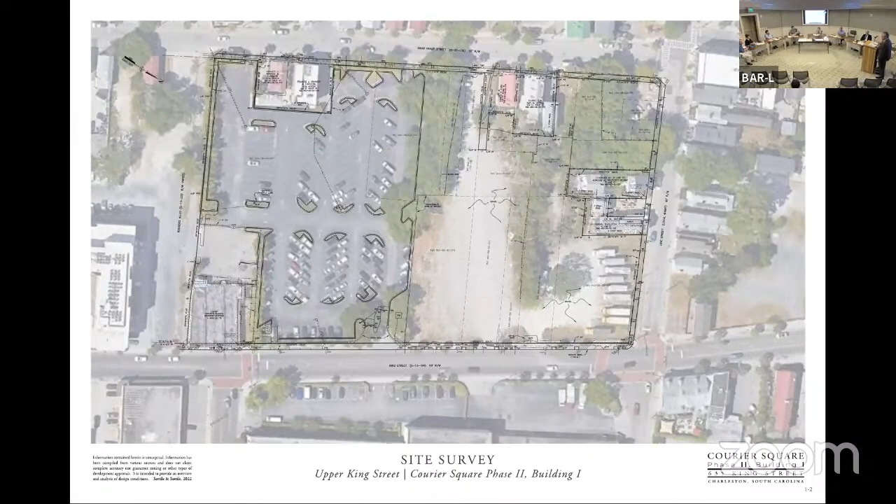The photographs of the site are provided here as part of the packet, and you'll see a forlorn King Street in some of these views. It's lost its physical expression, it's lost its pedestrian orientation, but all the building blocks are there. If you look at the image in the top left, there's a skyline view of the site from the Septima Clark Parkway as you come around that corner, and that was on our mind as we began to think about what is the building's responsibility to the street first, but then also to the city skyline.

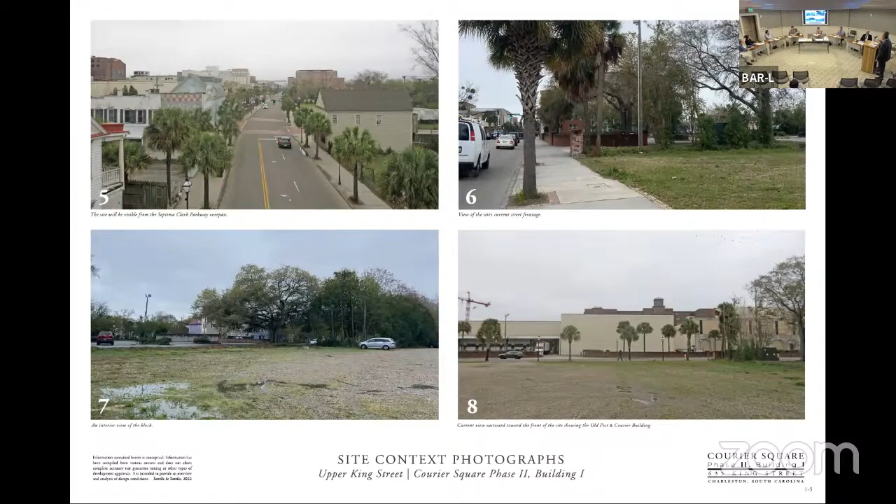This really came together for us during the design charrette, and we've included just a few of those pages. It's a week-long public design process that we held right near the site in the old printing building of Post and Courier. It also involved a lot of time in the field, and meaningfully, time we were able to spend with the faculty and students at the American College of Building Arts, which launched a commitment to reinvesting in the built environment and reuniting the arts and new work, which for a building of a larger scale is a tall order. It's one we've all taken very seriously, but that inspiration and partnership began almost 2 years ago.

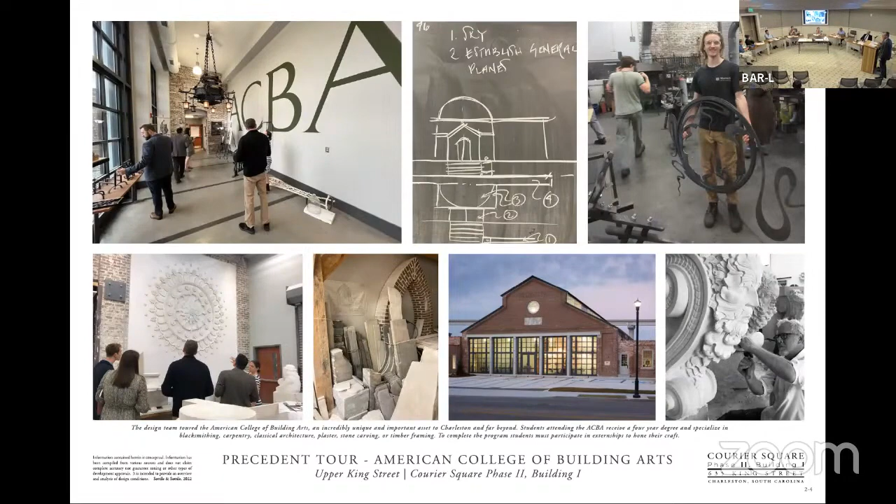We asked a lot of questions at the charrette that led to the design, and if I had all night we'd talk about all of it. But in particular, the need to celebrate the skyline again, to reanimate the skyline. The buildings, certainly in Charleston, are known for what they contribute to the skyline. So thinking of the head of a building in this humanistic way of thinking about architecture, what you place in the skyline becomes the definition of that.

So we thought of ourselves more as hatters, and not architects, during the charrette. And then for the street, thinking of ourselves more as cordwainers, or fine shoemakers. So we think about how a building touches the street, remembering the most important things a building will ever do is touch the street and touch the sky. We spent a lot of time during the charrette talking and thinking through that.

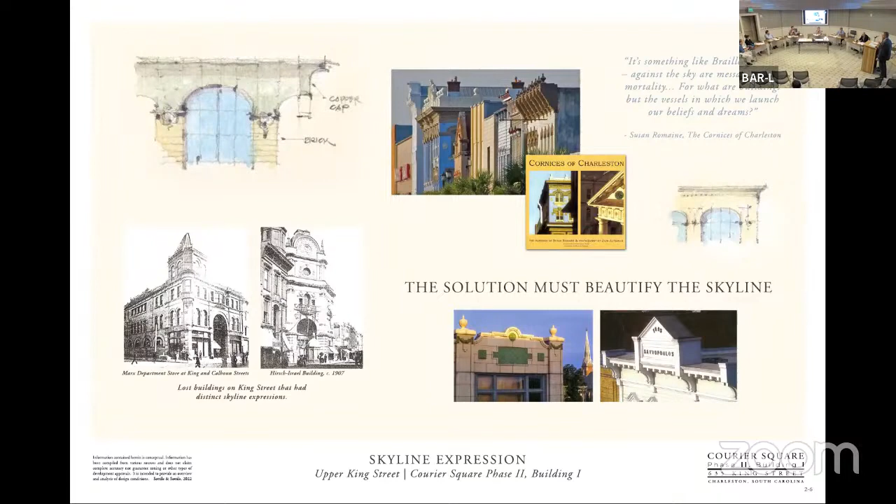Certainly Jack Alterman and Susan Romaine's fine book on the cornices of Charleston remind us what the city is known for: buildings that are still here and buildings that have been lost over time.

And remembering this is important, because you're going to see there's very much a call to action with this building, bringing back an exuberance, a celebration of the built environment and the work. We have to remember this is what Charleston does, and it does it better than almost any other city you can think of. So we brought that thinking into the design of the building, into the charrette, and it really became the foundation of our thought.

We published what we call the small manifesto on this as we worked through that process. Lawrence, you can.

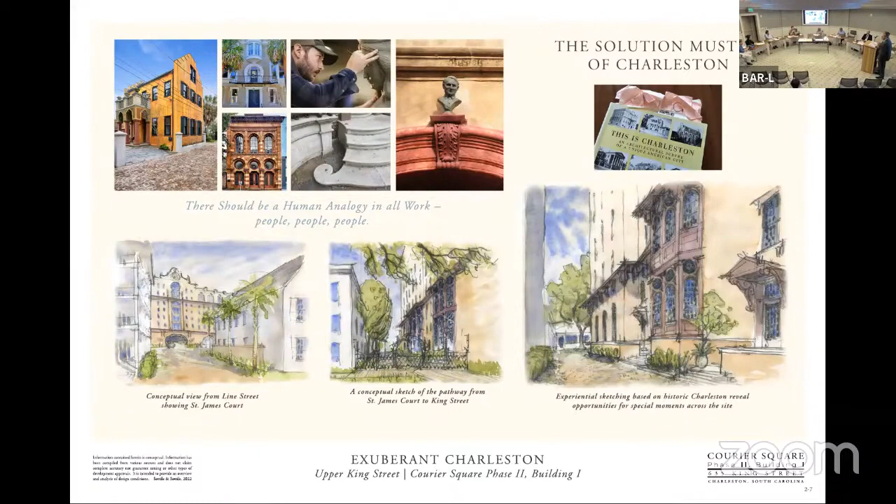So the manifesto, we really see this as our report card for this project from day one to the very end. We're at the second stage of a 3-stage approval process, but this remains our call to action: that the solution for this building must be humane and it must be of Charleston. It must relate well to all frontages. This is a unique site that has 4 very distinct frontages with different obligations. It must beautify the skyline and it must reward the street experience. So those are the things we know to be true.

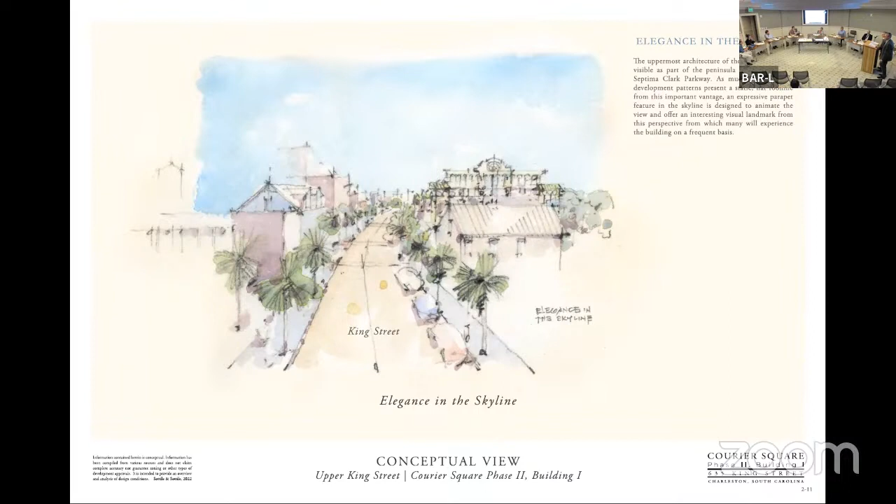So the building presents to the skyline an elevated parapet, that's to the regional viewer of the skyline. It's designed as a contribution to add up to other elements that are coming into this skyline: the cupola of the peninsula, the senior living project just to the south of us, the clock tower of the Guild. So elements on larger buildings that become part of Charleston's skyline over time.

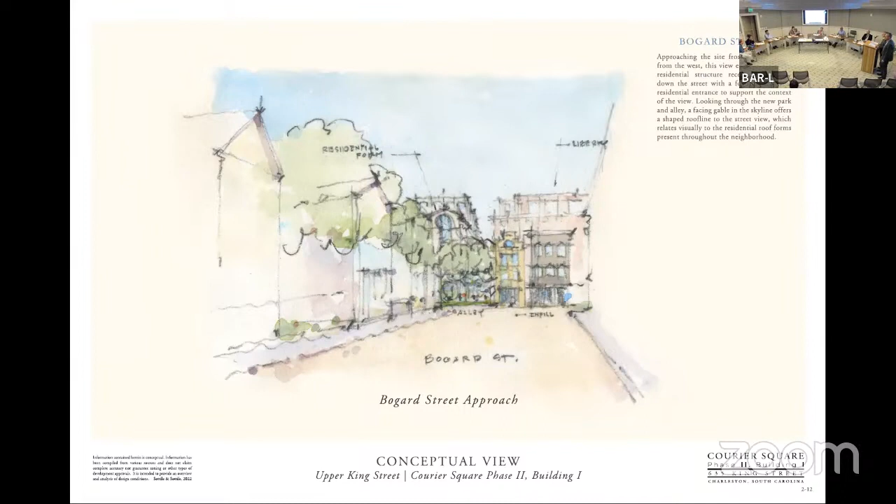From the neighborhood, this idea of creating pavilions really helped us think about approaching from Cannonboro, Elliottboro, looking up Bogard Street toward a new park that has an oak tree being relocated, a beautiful oak tree that becomes a connecting link through a new alley, Gabriel's Alley, all the way up to King Street, presenting a residential entrance and a pavilion to the neighborhood that harkens to the residential form language of the roof lines. On King Street, the principal facade is the 3-pavilion approach.

One observation of modern residential or multifamily development is often that the entrance is hard to find, and we felt with this project the entrance should be front and center, and it's exactly what you'll see. We'll talk about that in detail.

The architectural drawings we've presented at the preliminary review have been curated from a much larger set of drawings, but what we've built here for your review tonight at the preliminary stage of approval, we would like to walk through to show you all the principal elements, details and forms.

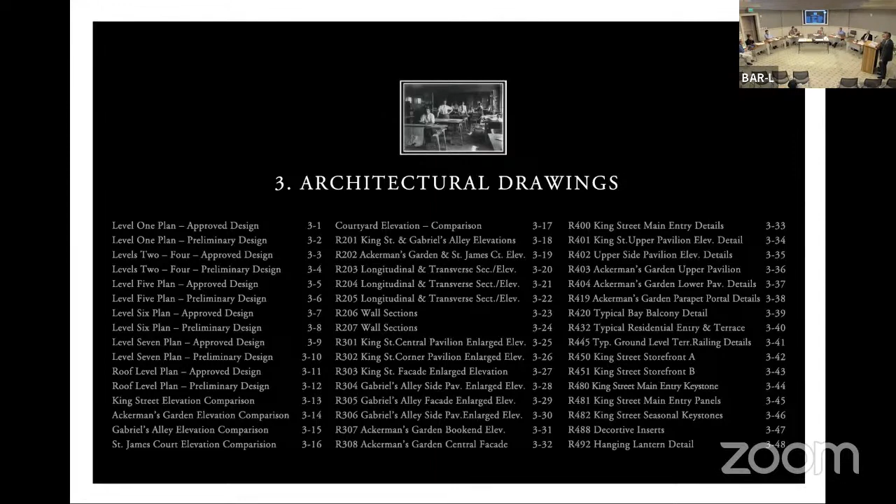I guess we'll start with the floor plans. These are the approved conceptual floor plans, and what you'll see is King Street is at the bottom, so we have our retail frontage along King Street with our primary residential entrance in the center. To the left is Gabriel's Alley, which heads into the neighborhood. Along the top is Ackerman's Garden, a new interior courtyard space. St. James Court is to the right side, set inboard from Line Street, where entrances to vehicular parking, bicycle parking, and some services are taken in the property more in the mid block.

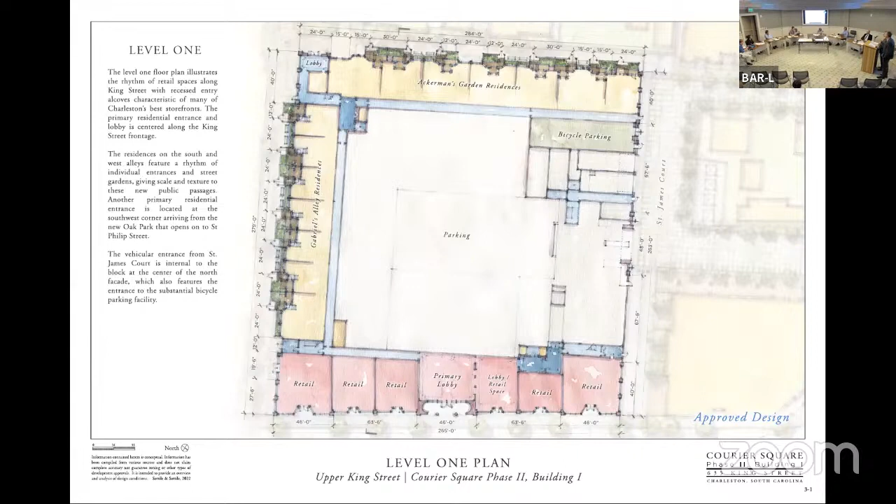As you'll see, the retail frontage on King Street is foremost about fronting King Street in that manner. The residential entrances in the alley and the garden are designed to create a scale, a texture, and movement in those surfaces to create an inviting experience.

This compares the development of the design during the last 18 months of work. What you're seeing here is the main level floor plan, which captures all the intent that you saw in the conceptual document. As we go through the building, this is a building that fronts all 4 sides, as you'll see as you go up through the building. It has residential use on the upper levels.

Excerpt from the construction documents. As we move up to level 5, we have a private courtyard that's part of the building, set back toward the garden side, also as a way to start to bring that massing down, to break that massing down.

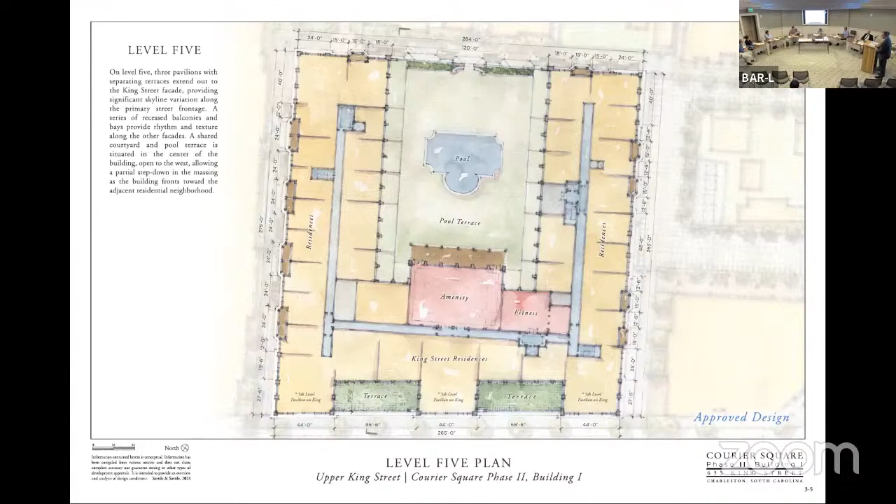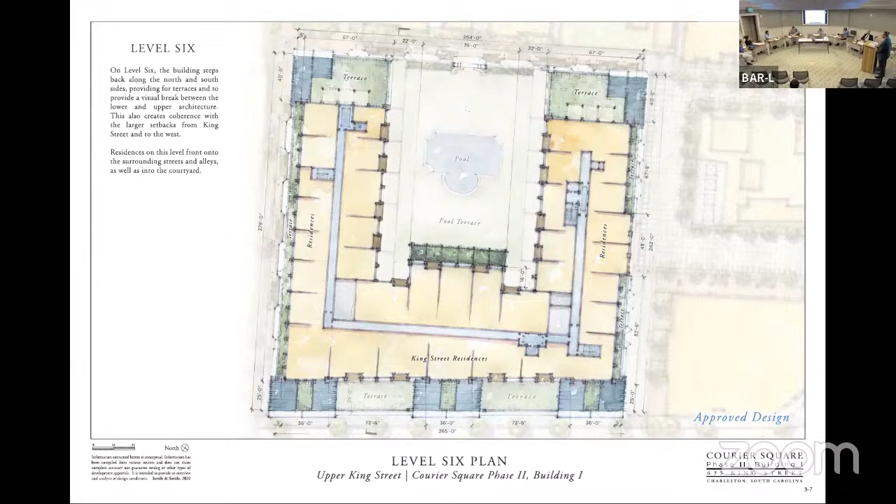Let's see the preliminary design here. As we go up to levels 6 and 7, the building starts to pull back from the neighborhood side, and continues up on the King Street side, set back from those 3 pavilions, and also set back from both the left and right sides to create a datum line of massing at that 4- and 5-story level.

So you see that here in the approved design. One element as we go to the roof level, I want to point this out, and I'll point it out on the elevations as well. At the conceptual design, we had a scheme with 4 large parapet features that marched across the building. It looked good diagrammatically.

That is something in further study that we've modified our approach to. We realized what really started the need for this was to have a really stunningly beautiful parapet facing Line Street, facing the regional skyline that we were looking at and inspecting, which we see from the highway. So we've modified that to really focus our energy on detailing and developing that as the primary parapet. I'll show you on the elevation some of the other thinking there, but that's a change I wanted to point out.

Here, what you're seeing stacked above and below is the approved conceptual design in the upper register and the preliminary design, an excerpt from the construction documents, at the lower level. And I would say when you look at this briefly, you'd say it should look like the same building. It is the same building. But I can't tell you how much work there's been to get from the top image to the bottom image.

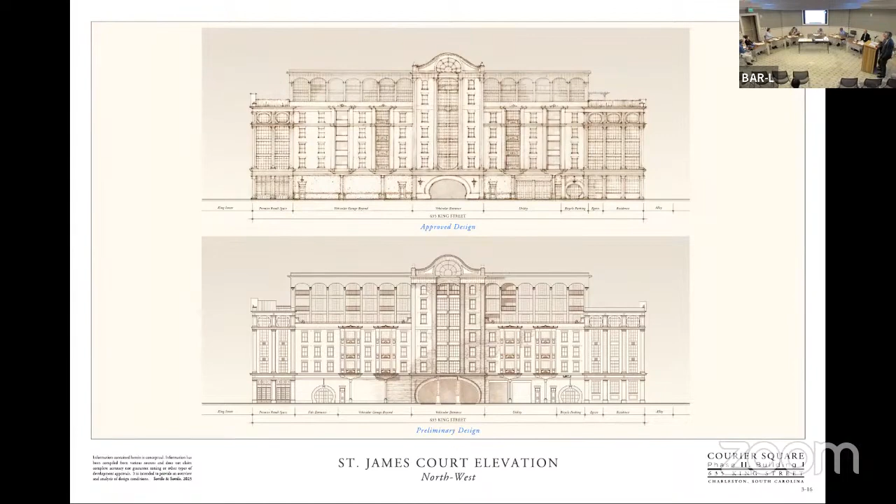The bicycle entry is to the right, and we modified an entrance to the left of that as well to create another residential entry into the lobby there. So these are all part of that secondary interior facade. I wanted to point that out.

And then these are the interior courtyard elevations that were prepared and approved. For the facades, we presented drawings at 3 different levels of detail. The 200 series drawings show the overall elevations for context, and also have callouts for each of the individual elements that are enlarged and developed in greater detail.

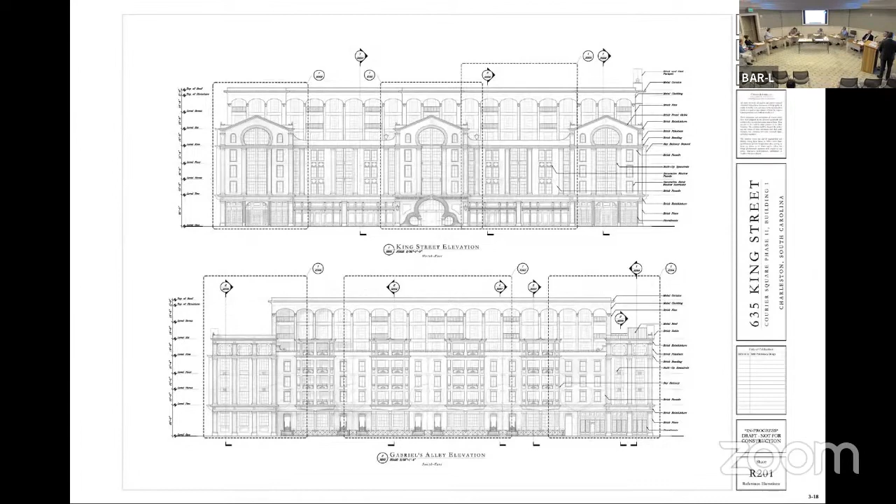So we're seeing here the front elevation and Gabriel's Alley elevation, and then here the elevation on Ackerman's Garden and the elevation on St. James Court.

This series is placed as a way of getting you locators to move into the more detailed drawings that follow, as well as section cuts. These are the interior facades and setback facade.

Building sections through the building. I'm pleased to say we've been working extensively with the LS3P team as the building has been developed to ensure absolute concurrence between all the facade detailing and the framework of the interior building. So it's a glimpse of that section.

A series of wall details shown here, which are helpful for us at this stage of the project to show the depth and movement in these facades. It's very important for a building of this scale to have those protocols thought through in terms of the assembly of each facade. So there's a series of wall sections of all the conditions through the building shown here, sheets 206 and 207.

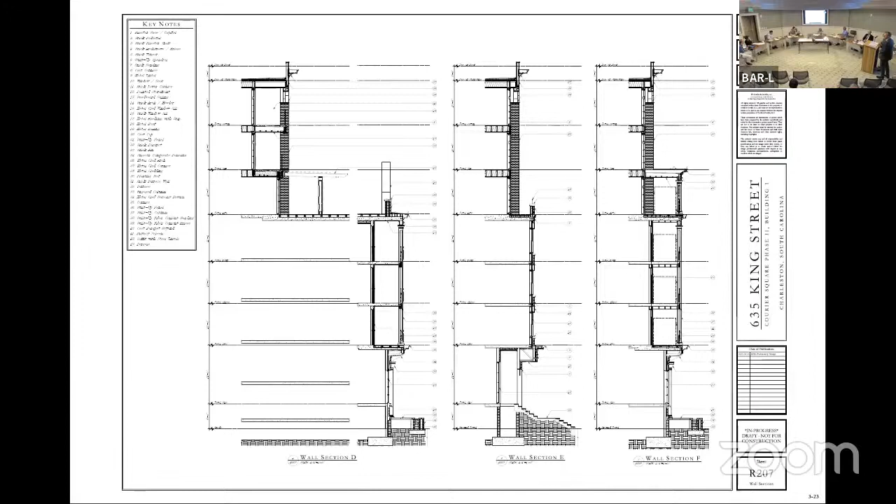The next series of sheets, the 300 sheets, take all the most important conditions of the building and enlarge them to go through the entire roster of materiality, identifying where those key elements of detail are. This is the central entrance to the building, an area where, working with the American College of Building Arts, we've really focused on finding where detail is most warranted. Without question, the front entrance is the place, but as we go through the building, you'll see those details incorporated throughout the design.

So you're seeing here a real focus on street level, and then a focus on the pavilion mass and the skyline on King Street. This is one of the corner pavilions on the King Street frontage, another example of a lot of focus on getting texture and a handmade quality to the storefronts at street level, while also getting the geometries and proportions of the King Street skyline right, resolving all this compound ellipse geometry into the design.

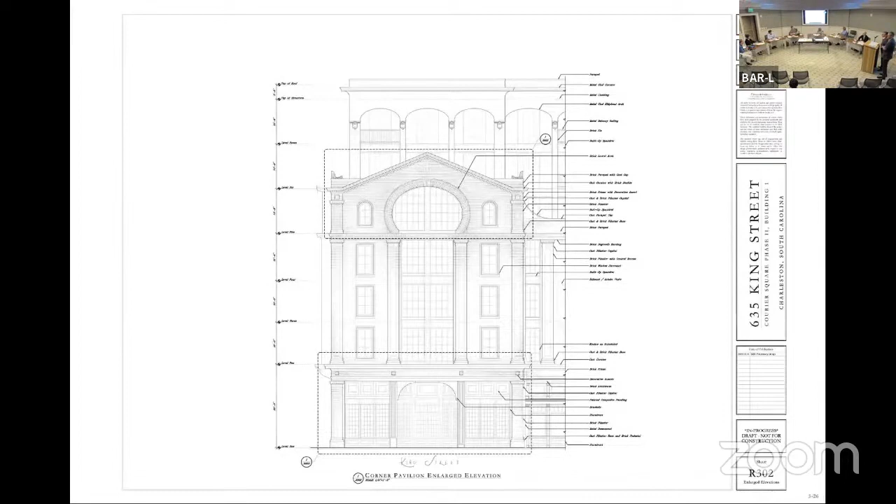These are some of the intervening elements along that King Street frontage. We have a rhythm of 4 bays that sit between the pavilions, 2 at each side. There's a keystone at the top of each of those window stacks, so there are 4 feature keystones along King Street. I'll talk about those a little later on.

A lot of attention is focused on King Street, as you might imagine. As we look at some of the other facade enlargements, I think you'll see that as we go around the building, we've looked for areas where detail can be incorporated throughout. For example, as we turn down Gabriel's Alley, we have our retail frontage on the first 3 bays folding around the corner, but you'll also see decorative inserts that are cast or carved into limestone and set above each of those pilasters. So anywhere you look, there's an opportunity that's been calibrated for handmade detail.

The bay balconies, as we move through Gabriel's Alley, are a way of creating texture and layers and aerating that facade. We have small individual residential entrances, 16 entrances along Gabriel's Alley and Ackerman's Garden, each with an opportunity for custom ironwork at its entry gate.

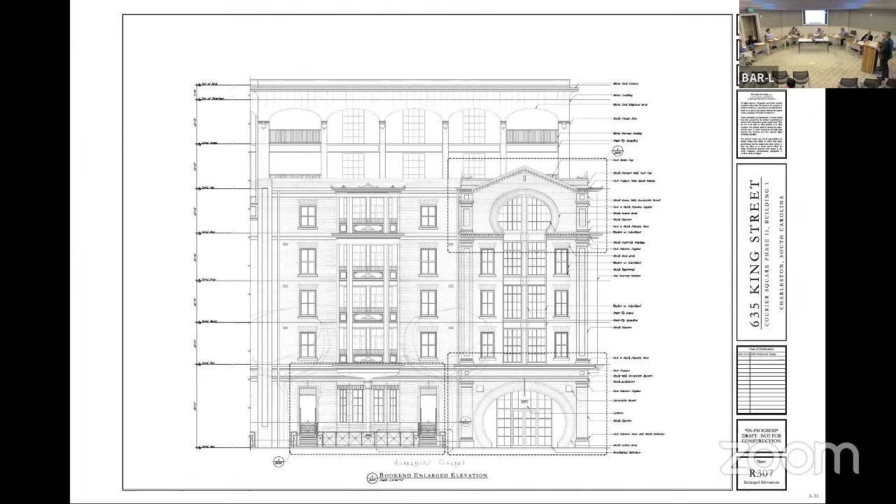And then this is the side of the pavilion as we head toward the Oak Park. This is that smaller, more romantic residential entrance that you'd see from the neighborhood as you come into the Oak Park—a diminutive version of those King Street pavilions. And then this is the central portion of the building where the internal courtyard is, with a decorative element to help enliven that facade and add light to that view.

And then we move into the 400 sheets, and we presented just a few of them here to give a sense of the work that's been done. The 400 sheets move up to another scale beyond the quarter-inch scale of the elevations we were just reviewing. Here we've gone into all of the key areas of the building and really worked through the geometries with the entire professional team, the builders, and the masons that have been brought on already to help us finalize each of these details.

And so you're seeing some of the most complex geometries here in this central entrance. What's good about this is it gives us real rules to proceed with on some of the architectural details. Those panels to the left and right of this central arch are designed as a complement to the keystone over that central entry, and that's one of the elements we've been working carefully with the ACBA on as part of the decorative program of the building. This lets us be very specific about exactly how big that panel will be and where it sits and courses into the brick, so we can begin preliminary designs and mock-ups of those elements. We'll talk a bit more about that as we go further along.

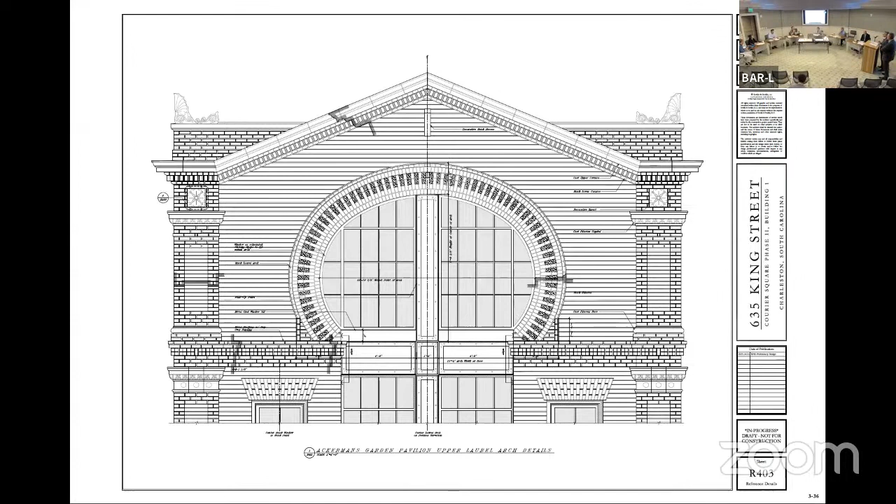So another example at a 400 level, here we have a larger medallion that's been cast into the surface or carved, but then placed in the surface during the coursing of the brickwork.

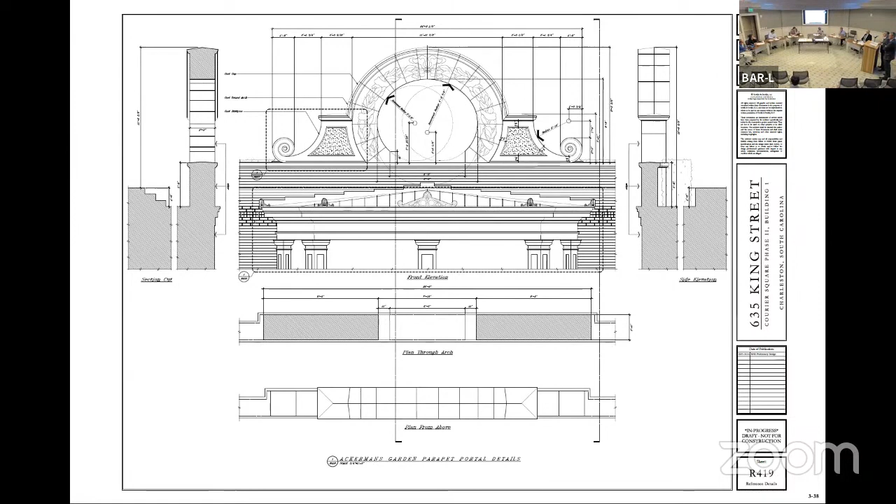We could go on. This is a close-up of that parapet element at the courtyard level up on level 5.

Yeah, sort of a gift to them. It's funny, and we realize with decorative details, none of these things are required, right? And that's the world that we're in now. It's the third element of the Vitruvian triad. The thing that's not required is actually the thing we need most right now.

So we've really, as a whole team, worked very carefully to take the promise of a beautiful building and hold on to that promise with every decision, knowing that none of these things are required, that they all, in a sense, are required by what the city stands for and what the future is. I could go on about that, but just to say I hope you see that in everything.

Close up at the alley level there, where again we have pilasters, limestone pilasters that are set into that facade, actually modeled on some of the coursework that the ACBA is doing already today in their studios. So everything has been done with an eye toward implementation and feasibility.

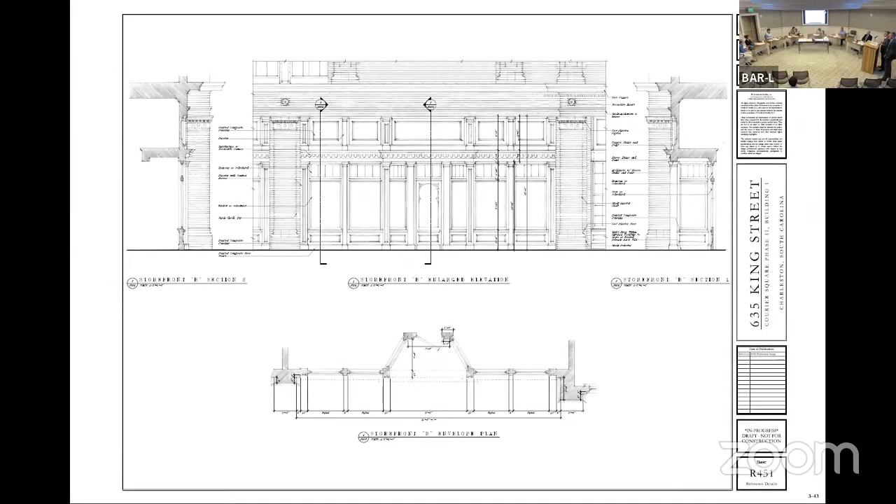Close-ups of some of the ironwork designed for that alley. A bit of this on the storefronts here, this again to show that the storefront design is meant to be a built-up storefront, not so commercial as so many storefronts are today. We have two types of storefronts along King Street, one of the ones at the corner pavilions and then the intervening ones, then of course the central entrance all of its own.

And then to the decorative details, the fun part, we wanted to share some of the thinking here in this question about returning to the art of building. We felt there was maybe no more appropriate location than the central entrance to the building. So the keystone that sits above that central main entry on King Street is symbolic in bringing together architecture, painting, and sculpture again. And so our keystone represents a figurative allegory to architecture.

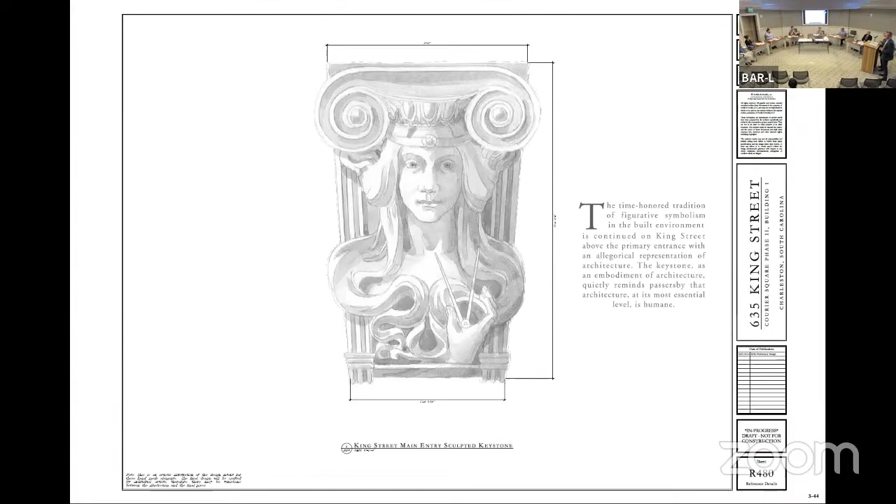And to the left and right, we have the limestone panels there representing painting and sculpture, both supporting architecture. So that's sort of a thesis within a thesis. But we felt like this was the place to do it.

Really create something to stop and study, and something that is made by people. And I think that's what the resource of the American College of Building Arts is such an incredible asset, not just to Charleston, but to the world. So we're very excited about this.

We have field tested even these mock-ups. We've printed them out at full size and we've held them up in public. We've sometimes gone to parking garages.

We got kicked out a few times trying to climb up to a height where a detail would be seen from the street, to hold that detail up and test its size, and in some cases we made small adjustments. We presented some of those here.

The four keystones along King Street each represent four seasons, and four seasons of architecture. Spring is Art Nouveau, summer is full-blooded classicism, autumn is Baroque, and winter is Gothic design. So another story, all playing off the same theme.

We actually have, just to give you a sense of scale, some mock-ups of these elements that have been prepared. We've been able to take those out in public and hold them up, and the stir that created on King Street the day we were doing those mock-ups was something - everyone stopped and looked up.

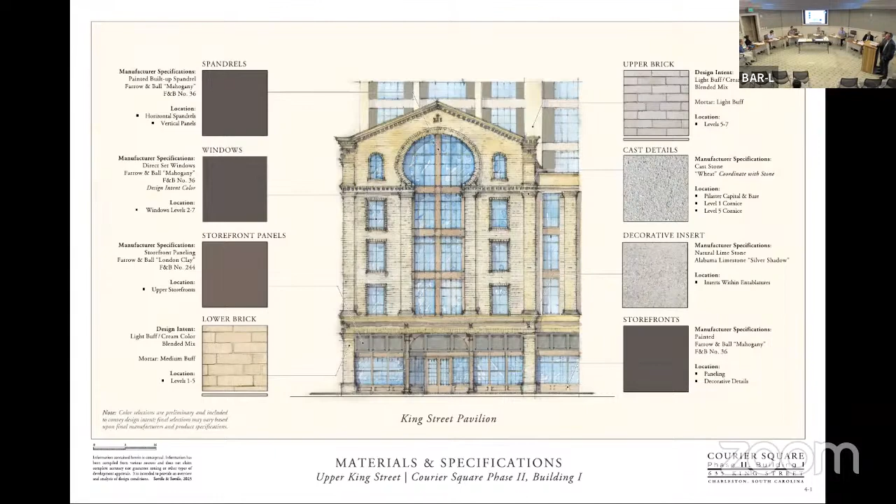That theme really - this building is very much about a unified expression and a single theme. Of course, this will be vetted again through final construction documents, and ultimately in the mock-up panel. But we wanted to provide that direction and show how it relates back to the conceptual design as well.

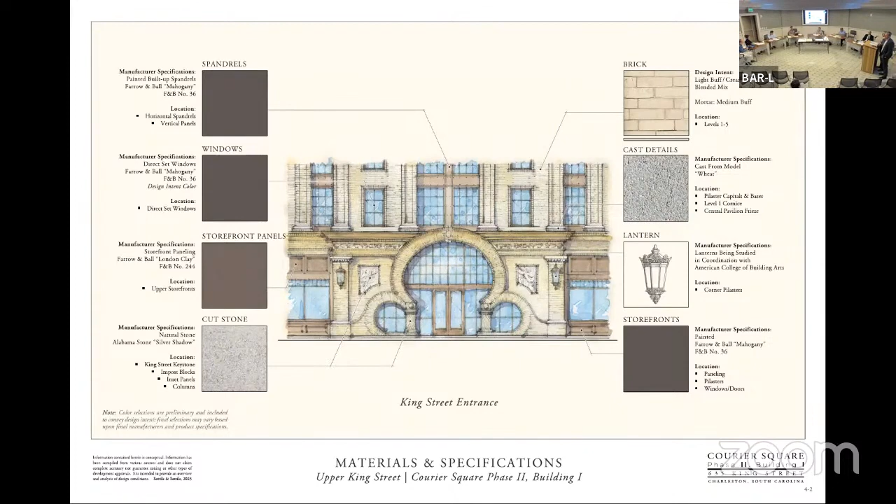And then as we move up into the building, slightly lighter brick, and then kind of softening lines in that upper cornice.

Down in one of the alleys - there's actually a significant, you're going to hear a bit more about the landscaping in just a few minutes from the design works. But that's very much part of the experience of going through the gardens in the alley.

Window and door specifications, at least the basis of design at this stage of design.

I wanted to close our presentation with a chapter on this, because this has really become very central to everything we've been doing with this new building - creation of a new soul in the city. And it's the art of building. We wouldn't be here talking about this without the American College of Building Arts.

I'm so delighted to see we have a huge turnout of faculty and students here tonight - Joseph Kincannon, Steve Kester, Angela Cabana, I'm not sure if she's here tonight. We've been working with Matt Garten. The leadership has been very supportive, and it's easy to say we're going to do this, but it's actually not so easy to do it.

William Santiago from our office has been working full-time with the ACBA now for over a year, multiple meetings, vetting every detail that you see here. I wanted to share that with you to let you know how excited we are about it.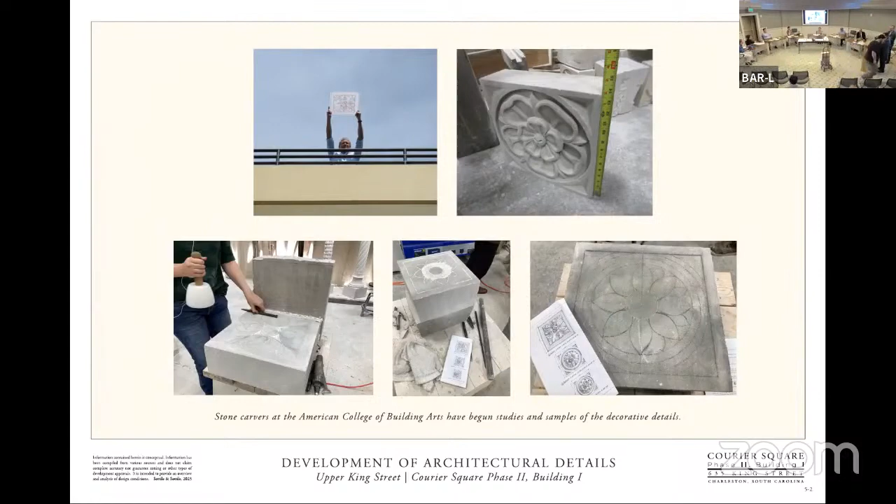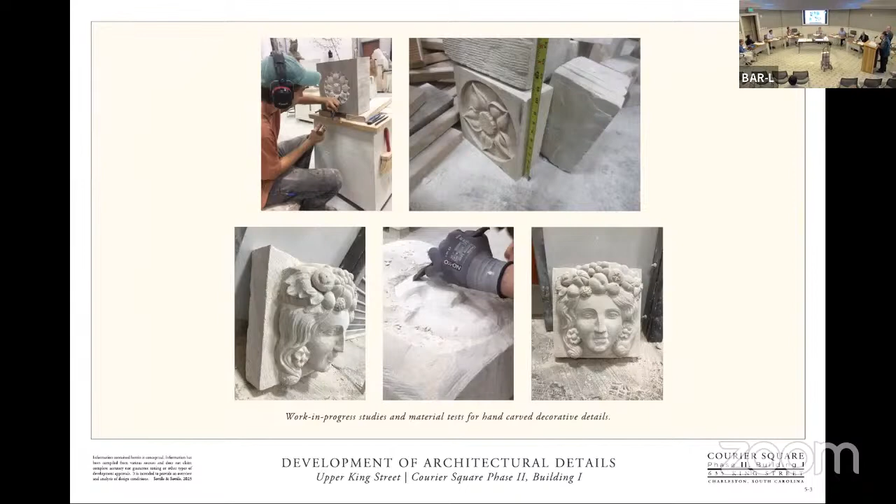One of the keystones, which is in progress — which one was it? This is summer. This is summer, yeah. It's underway as we speak.

I'm not supposed to say we're starting to make stuff before we get approval, but this stuff takes a really long time to make, so we're keeping our fingers crossed.

But if you need models for the rest of the seasons, pick a season — you'll find there's several of something on it. There are 13 pilasters, so each one is planned to be a month of the year, and then the 13th will be the sun, around which the earth revolves. So that's the creative brief for those.

So if you want to pick a season, or a month... And I could go on as much about the ironwork as well.

That's another hallmark element of Charleston's built environment, one that the ACBA excels at. In fact, they've recently moved their ironsmithing studio across the street from this building. They're in the old printing shop of the old Post and Courier, so it's literally across the street.

This idea that we could make a larger building today, but make it at home, is something I can't tell you how excited we are about. Matt Gard was at the ironsmithing world championships in Tuscany just a few weeks ago. So we have world-class talent across the street.

So we'll close with that — I think I've probably gone on beyond my time already, but we're incredibly excited to be here after a very long journey, and this idea that we can make new landmark buildings, an architecture that celebrates the art of building and provides beautiful and rewarding experiences to the public. Thank you, you've been very generous with your time.

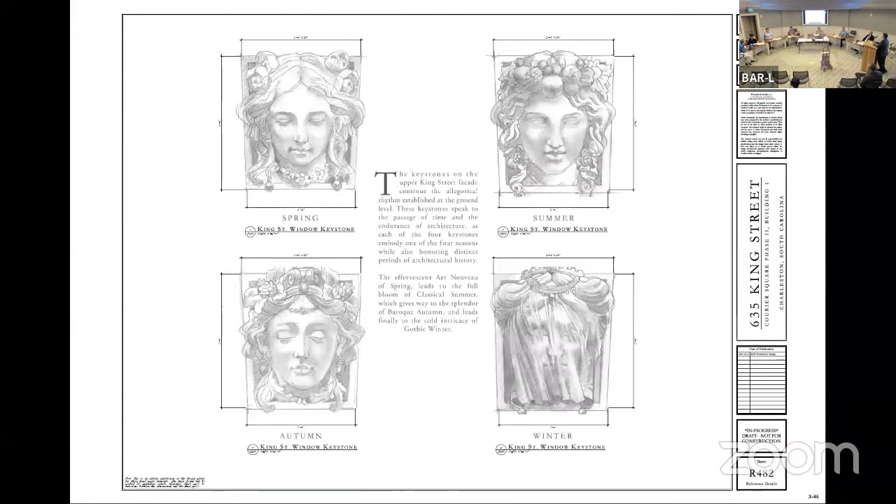The parapets that we presented in the conceptual approval, in a sense, made for a more successful diagram for the building. This is always the reality of a three-dimensional building versus what you see in a two-dimensional elevation. So we presented four marching parapets across the roof, which were all really born from the parapet—you see it here on the bottom sheet. We have a masonry portion of the building that reaches all the way up to carry that parapet, and that's the parapet that is seen. In fact, it's really the only parapet that is seen on the building.

And that's the reason that form came about during the design process for conceptual, because it presents itself to the highway. The others, I will say, diagrammatically on a two-dimensional elevation, we thought helped the overall conceptual design. But as we studied them, we realized they didn't relate as well as we thought they did.

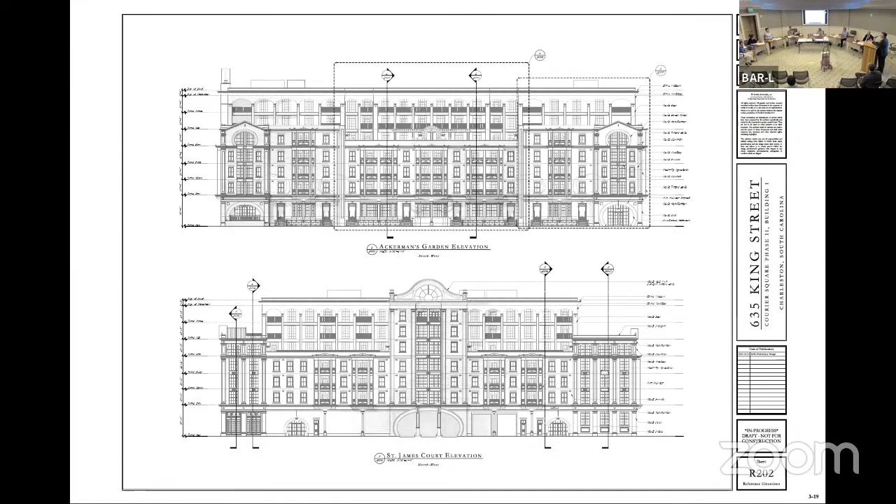Because if you—Lawrence, could you go back to the comparative elevations—go back one more—what you'll see is that the other parapets were sort of added on, and they didn't relate so well to the cornice below. We have a metal cornice that's that marching sort of backbeat, that rhythm that's there.

As we tried to reconcile it, we really did work through it a number of different ways, and we felt like they don't really want to be there as much as we thought they did. They look great in plan, and they look great in elevation, but we realized it's sort of fighting the tectonic language of the building, because we're trying to make the building lighter as we go around, and putting this heavy parapet above the metal cornice seemed like an afterthought, like they were tacked on.

Whereas where we really want it, on St. James Court, it's sitting on an entire brick pedestal—it comes all the way down to the ground. So as we studied it, we realized we're trying to make this impossible building happen, and where can we, as designers, say this is an area we think we can simplify without hurting the final effect of the building. I would rather get one parapet really, really good—the one that really matters—and not do three that don't really want to be there.

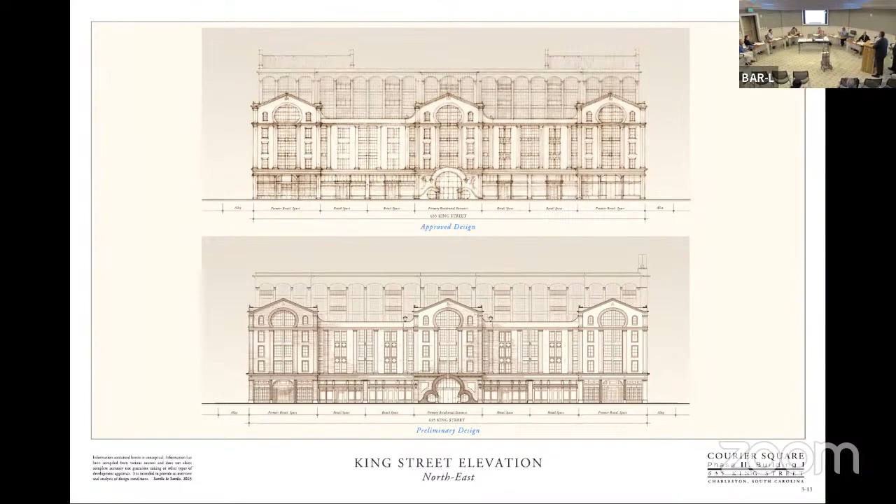Right, so maybe I can. Yeah, go ahead, talk to that. I don't know what sheet that is, I wrote down about it, but probably in the 400s.

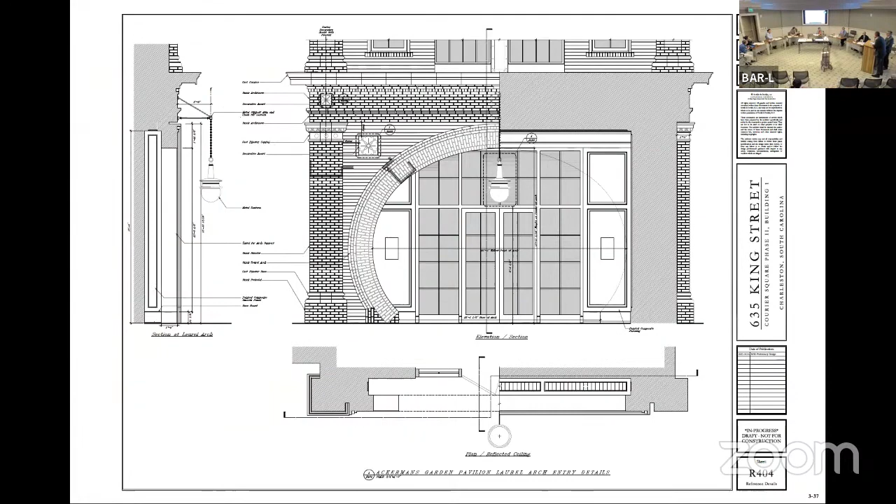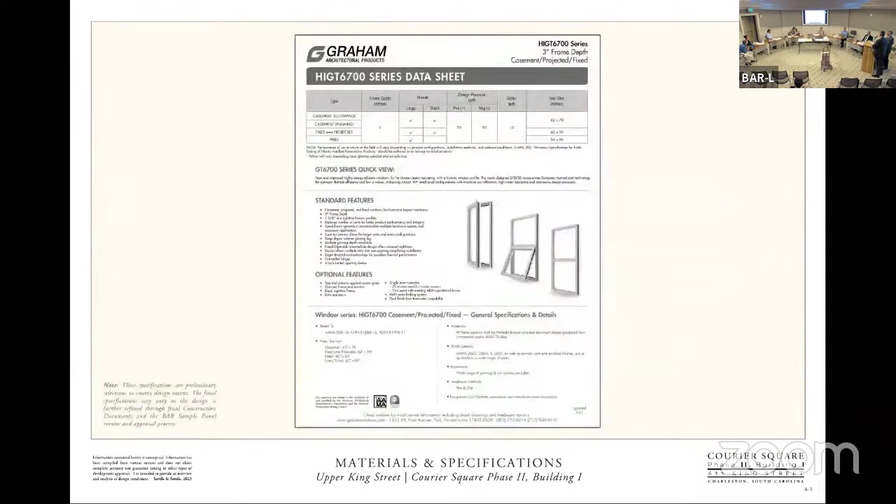So we finished a building not too long ago at 741 Meeting Street, the office of Middle Street Partners. We did some experimenting with wood, a wood storefront, hardwood. The approach we took is it's basically soft framed, it has millwork applied to it, and then the windows are just windows. So that's a similar thing we're thinking here, only for a large scale commercial building we may want to use poly ash or other more durable materials in a painted finish rather than use mahogany. That one was actually designed to be painted, but when we saw the mahogany we kind of couldn't paint it.

So that's the thinking, and we haven't finally identified which range of products would work together best, but poly ash has been one I've used that seemed to work pretty well. The Boral product is one, but it may be an assembly of a few things that have to do different jobs. And I see a lot of paneling in that, and I've not used poly ash, but how do you panelize that?

Right, you can't route it. It comes in a range of millwork trim profiles, just like PVC and wood and all the other things. So you can usually get that range of profiles and build an assembly of flat trim, panel molding, like wood, flat but panel, built up with paint. It's smooth painted, and the finished effect is like a wood storefront.

That's very helpful. Same thing for the upper windows. Again, you've got wonderful details, and I worry about what that window will really look like. We don't have any jamb or head details. Is that just going to come in final? Is that the plan? We're still figuring these things out. On a building of this scale, you're working through various suppliers, but the mock-up will have a window installed in it. The desire is kind of a direct-set appearance where there's not a lot of sash exposure, kind of like factory glass. That's what we're going for.

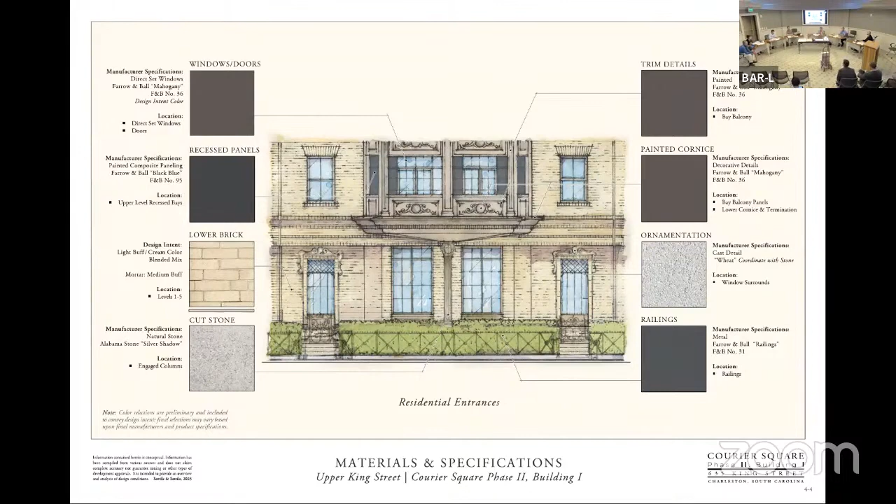Thank you to the applicant. Good, we're looking forward to good things going ahead. We got work to do. That's okay.

Very good, thank you for keeping momentum on the project. We have a whole team of artisans that are graduating, they're planning to get to work. So thank you to those who visited us, faculty, staff, students, most importantly of the College of the Building Arts. Thank you for being here, and hope this is a springboard to you doing more work in the community. Maybe next time you'll get a feature on Channel 4.

All right, very good. We had some members of the public and the applicant clear the room, but we're now prepared to go on to the related agenda item number 4. Agenda item number 4 is 635 and 649 King Street and 244 and 230 St. Philip Street. This is new related construction in the old and historic district, and the applicant is requesting site improvements surrounding the development of 4 multifamily residential buildings.

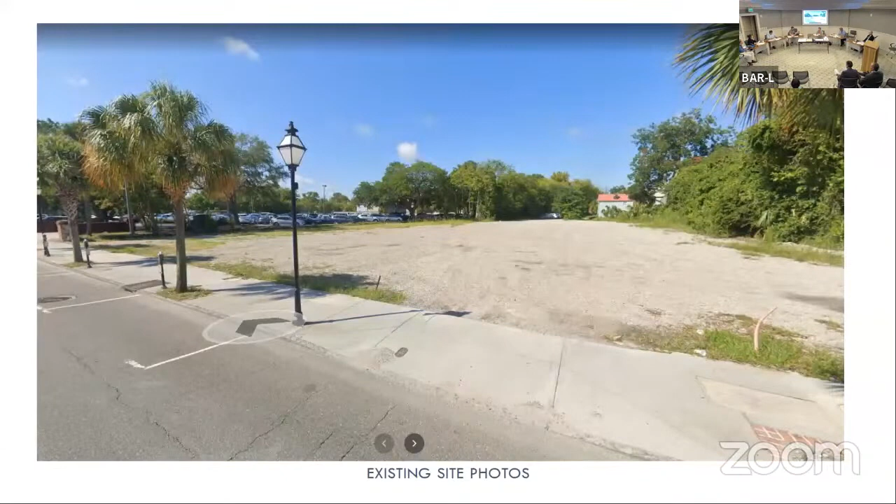While you are looking at the context, which you should be very familiar with now, just a reminder that the hardscape and site improvements have been previously presented as part of the overall presentation for Courier Square Phase 2. However, these are now being reviewed in their own right and shall be considered in coordination with the surrounding buildings of Courier Square Phase 2. All right, the applicant's presentation.

Thank you. My name is Scott Parker with Design Works, and with me this evening is Ariane Wolf, one of my colleagues at Design Works. She is the project manager for this project, and she will take you through the presentation this evening. So Ariane, yours.

Hi, I'm Ariane Wolf with Design Works. We're excited to have the opportunity to walk you all through this site plan. Everyone just saw the previous presentation, so I'm sure you're familiar with the context. The site plan is for building 1 as well as buildings 2, 3, and 4, which have received prior preliminary approval from the BAR. You can go to the next slide.

So this is the overall site plan, and I will be showing you some closer plans as well as elevations as I move through the presentation, but just wanted to give you the overview here. I'm sure you're all familiar with this from prior presentations. We have St. Philip Street to the west, Line Street to the north, and King Street on the east. We have 4 buildings on the site, and the design has really considered how people inhabit this space and how they move through the block and through these spaces.

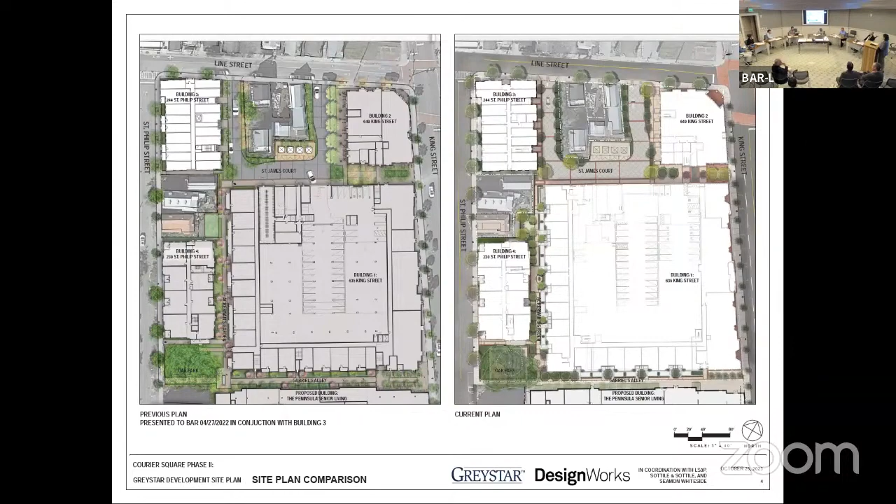But overall, it has remained consistent. You can move to the next slide.

Thank you. So this is some elevations along St. Philip Street. On the top half of the page, this is the elevation of building 3. This is a rather simple landscape here. We have some low brick knee walls to create some garden spaces between the porches. We've really just worked with the articulation of the building there.

On the bottom half of the page, you'll see an elevation of Oak Park. So you'll see the transplanted live oak here. This is a 37-inch grand oak that's currently on the site, and it's being transplanted to this location. I will show some photos of that in a moment, but the work has started on that tree. The company that moves the tree has started to remove the asphalt. Currently, it's in the parking lot to remove the asphalt around the root ball, fertilize it, get some irrigation on it, do some root pruning. So we're very excited about that. It looks like May or June of next year is when that tree move should happen.

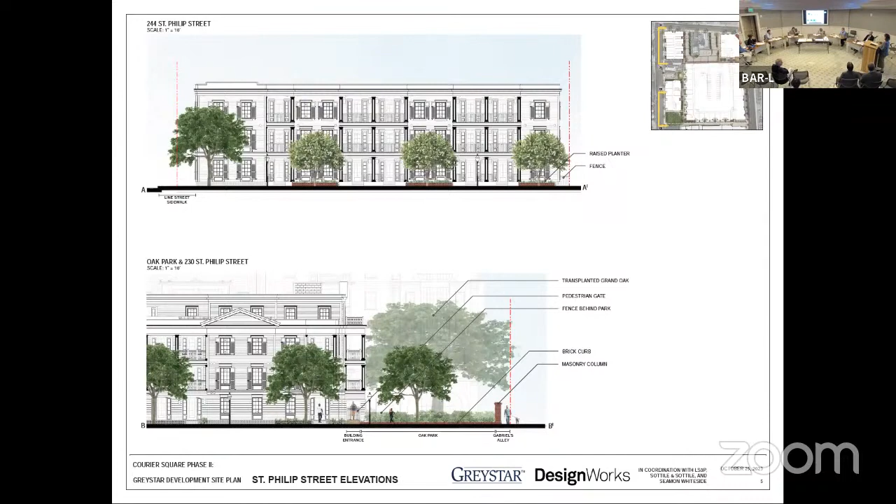But the landscaping around the park is a relatively light touch, mostly in deference to that tree, trying to make sure that it stays healthy and keeps people from walking too closely to the root ball of that tree. But also making sure that this is a public park that's, in some ways, a gift to the neighborhood, and just making sure that people can really experience that.

If you could move to the next slide. These are the Line Street elevations. Again, a relatively simple streetscape here. We have crepe myrtles as our street trees. We do have a dining arcade between building 2 and the exit from St. James Court. So you'll see that in the elevation.

If you could move to the next slide. And then King Street. This is a continuation of the standard King Street sidewalks with the palmettos and the granite cobbles. And we have 2 moments here for dining and to engage people and bring them into the site. Gabriel's Alley on the south side. And then on the north side of building 1, there's a larger courtyard that is intended to have some dining, as well as circulation to and from the parking.

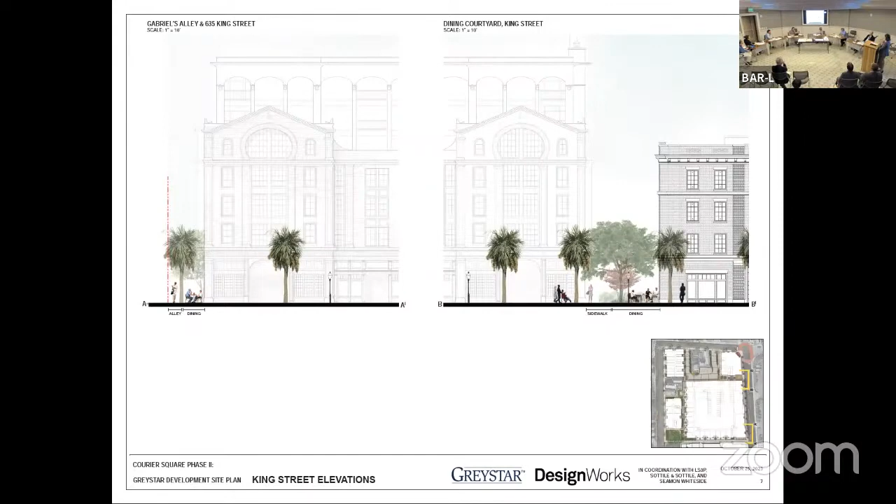I do just want to note that Gabriel's Alley, of course, I'm sure you're all aware, but it is intended to be constructed on both Greystar's property as well as Liberty's. So what we're showing here is just half of that, but it is being designed as a greater whole, but this project is just doing half of it. So just to clarify that.

If you could move to the next slide. So we have our images of hardscape materials. We have tabby concrete throughout the project. We have Pine Hall brick pavers. We're suggesting the rumbled Coca. We have a limited portion of bluestone in some key places. We have plantation mix in some of the garden spaces. And then we have scored broom finished concrete with brick bands in the drive port.

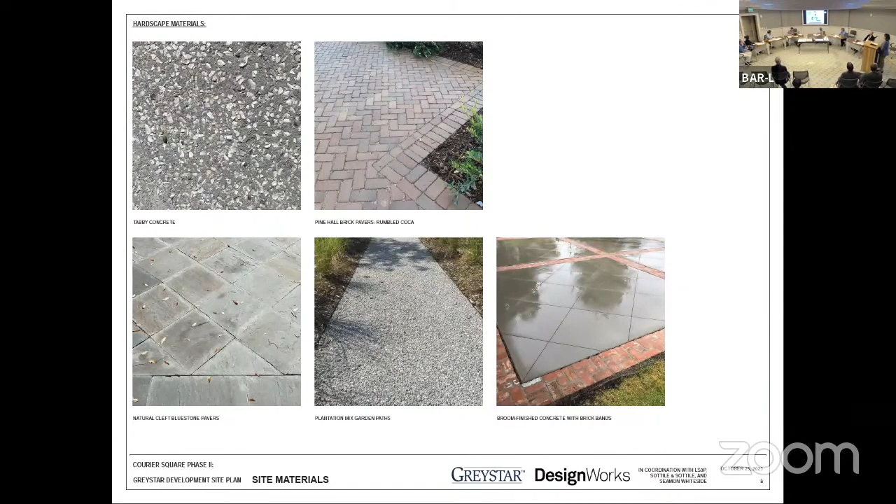If you could move to the next slide. So this is a plan view that shows Oak Park. This is really, you know, this whole space is about the tree. There's also a beautiful entrance to the building here as well, but it's really about the tree and making sure that people get to experience this tree. So we have a gravel path through there with some benches placed under the tree for people to enjoy.

I will note that Ackerman's Garden is the semi-private space on this project. So that is gated. That is for residents of building 4 and residents of the townhomes in building 1 only. So you'll see some gates there.

If you could move on to the next slide, please. And this is going a little bit further north. You'll see there's a moment for this really lovely courtyard. This is centered on building 1. So where that laurel arch is occurring on the 5th level, this courtyard is happening on the ground plane. We also have, moving a little bit further north, a small garden space here. This is again for residents to enjoy.

I do want to note that we have worked closely with all of the neighbors about what materials, whether we have walls or fences. So you will see both wooden fences as well as masonry walls on this project, and that has really just been in conversation with the neighbors and what works best with their properties.

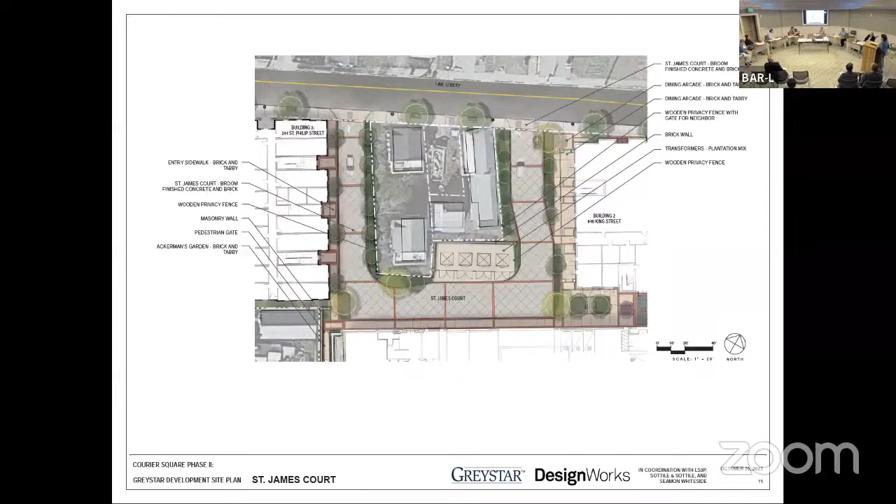Yes, and there's also another portion, maybe back one slide, on the northern portion of building 4, there's a wooden fence there as well. And who will have control over the design? Because it's...

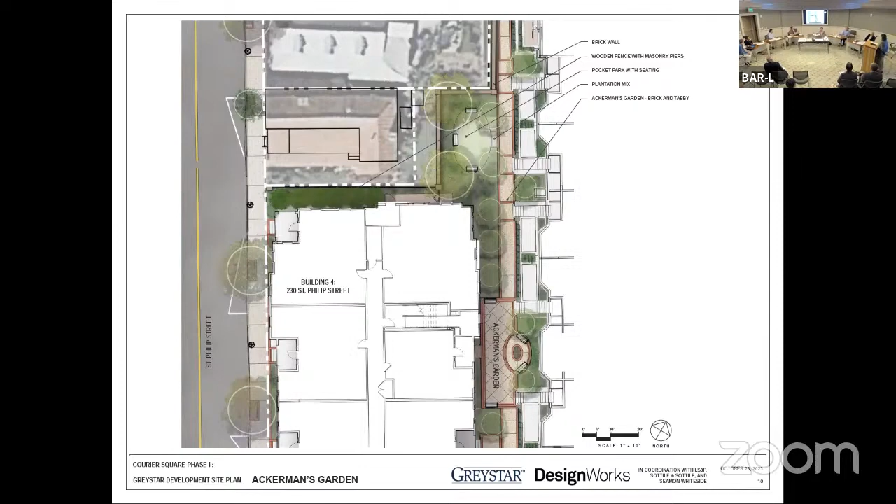There are details in the drawings if you'd want to advance to those. But you're referencing the other property owner that's there, their privacy fence ultimately. Building these fences, correct? Yes, yes, they're in our... I apologize, it's back maybe closer to LS 503.

So the one edge along St. James Court you're talking about, there's a number of existing trees on that private property, with the root right there along the property line. The property owner was really reticent to have a masonry wall constructed along that edge. You're talking about this? Yeah, is that the... the bottom portion of that slide is the wooden fence.

So that reflects site conditions and what the neighbor thought was appropriate. Is what you have, and you're not going to destroy their landscape, imagine that, especially their trees. The developer being a thoughtful neighbor.

In this very urban setting, it deteriorates and things like that. I understand it. You also can probably span between the posts and things like that, don't have to go into the ground, but span between the columns and have it... I'm sure it concerns you. Further board questions at this time?

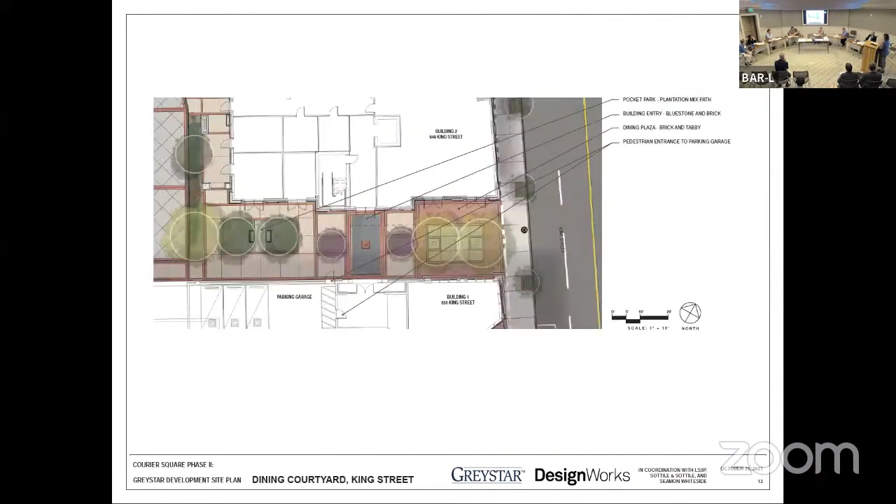The large tree that's being transplanted, and how the roots have to be protected, is that forever? Like at some point will people be able to go underneath it? Yes and no. For several years people need to stay off the root ball. If you go back to the site plan, you'll see what we at this point think is the extent of the root ball. They'll confirm that as they do more work, but the path is actually outside of the root ball, so people will be able to experience being under the canopy of the tree, but they will not, we hope, ever necessarily be directly under the tree.

Ever seen kids before? Those kids live around the corner. Be over there. Further board questions at this time?

Applicant could have a seat for the moment. Is there any member of the public wishing to be heard on this agenda item? Seeing none, city staff comments or recommendations?

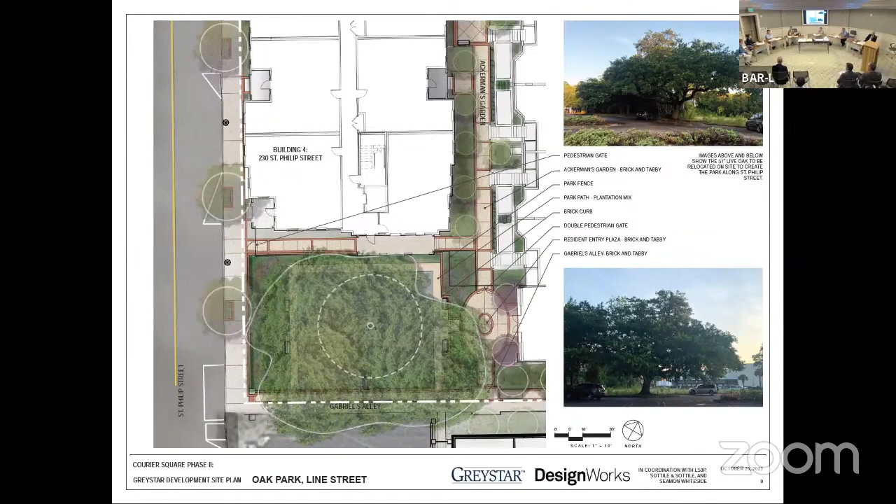Well, first of all, staff noticed a couple of changes on buildings 2 and 3 as they were depicted in the imagery review from their previous approvals. I believe that's just a drawing issue. Any building revisions will need to be brought to staff's attention and may require board review if significant.

Okay, and a few conditions of approval. We have already begun talking about this, but number one, wood fencing is proposed at the north end of building 4 and at locations against St. James Court. When I reviewed it, it looked like also two sides of the transformer yard. Wood fencing is not atypical for St. Philip Street or Line Street and is residential in quality, but it does seem substandard in comparison to the buildings of Courier Square Phase 2.

Study alternatives to the wood fencing proposed, at a minimum where they're not touching a residential property that has a desire for wood fencing.

Number 2, at St. James Court, study the placement of the brick bands to coordinate symmetrically around the vehicular opening at building 1, which is taller and a highly emphasized portion.

3, restudy the brick banding at other elements on the St. James Court facade to see if better coordination between the horizontal ground elements and vertical building elements of building 1 can be achieved.

4, at Gabriel's Alley against building 1, restudy the pavement joints to coordinate with or around the building elements. We touched on that we're only getting half of that alley, but you're working with your facade, so I got that.

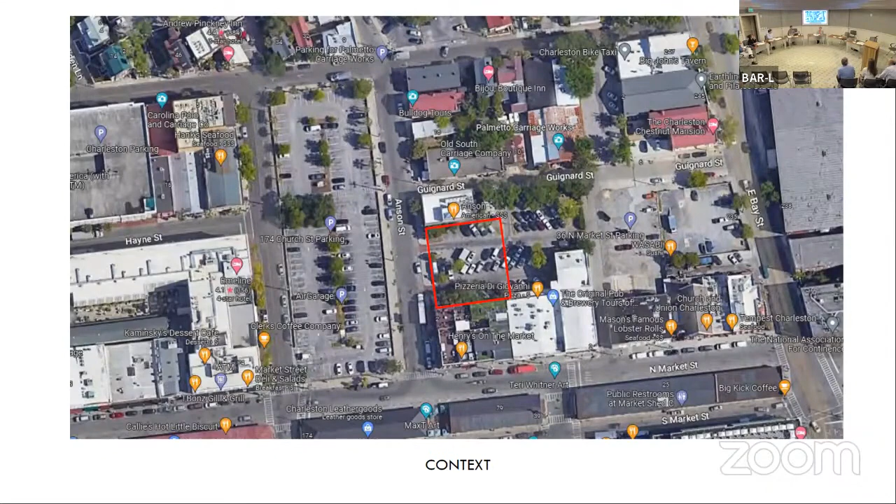You ready? Agenda item number 5. Okay, number 5 is 2 Anson Street, new construction, 3.5 story height district in the old and historic district. Let's see what context we have. The applicant is requesting preliminary approval also. This is the location on Anson Street, with Market just to the south. And the condition of the site today.

I will go through this fairly quickly. We're going for preliminary approval. Some of the board comments last time, when we got conceptual approval earlier this year, were fairly minor, and I will address those as we go through. So next slide, please.

I think everybody's pretty familiar with the site. I think the key takeaway here is that we are situated as a true infill project, between two existing buildings. Site plan - again, you can see Anson Street there on the left, and an existing structure to the north, and one to the south. This is a difficult site in that this is our really only service area. So we've got a service alley there.

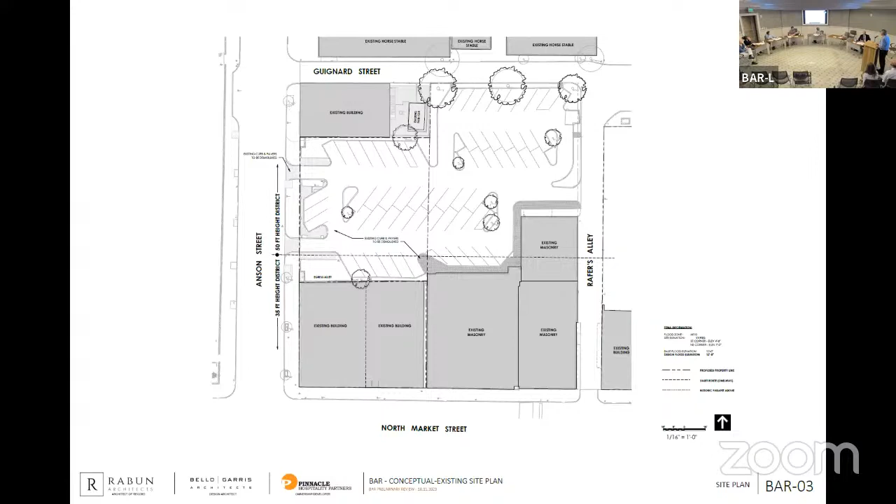Again, site plan - I'll talk about this a little more in detail, but this building is built right on the adjacent property line, that's the Anson restaurant. We've got some challenges with that, and I'll talk about that. On the ground floor, the public facing side is all public space - restaurant, lobby, and the garage. None of this is really changed. Next slide.

So we've got the conceptual floor plans and the current floor plans. If it's okay with the board, I'm going to skip through those. Nothing substantial has changed since conceptual that affects BAR. It's a hotel, it's a fairly straightforward floor plan, so unless the board has questions, I'm just going to go through that. Thank you, Lawrence.

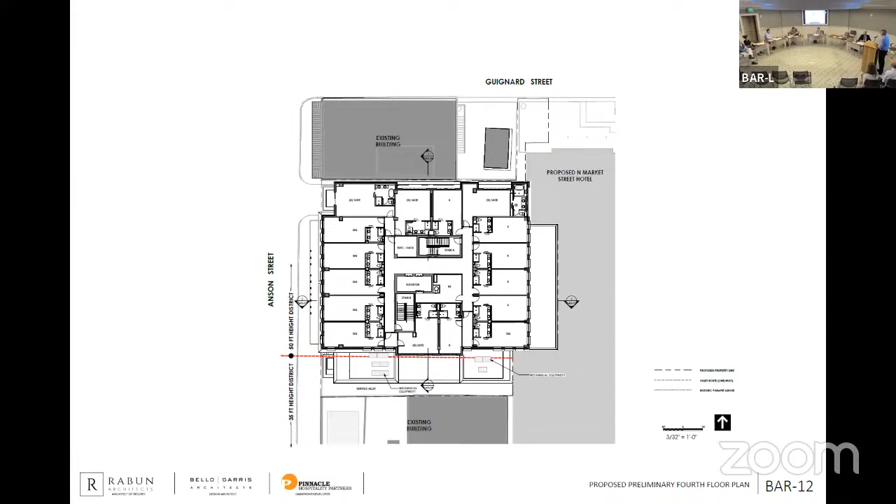Just to remind everybody, when we presented this at conceptual, we talked about some of the inspiration behind the design, and the first thing we always do is look at the context. Ansonborough's character-defining feature is all the masonry structures, beautiful, handsome brick structures. So we were drawn to that for our building.

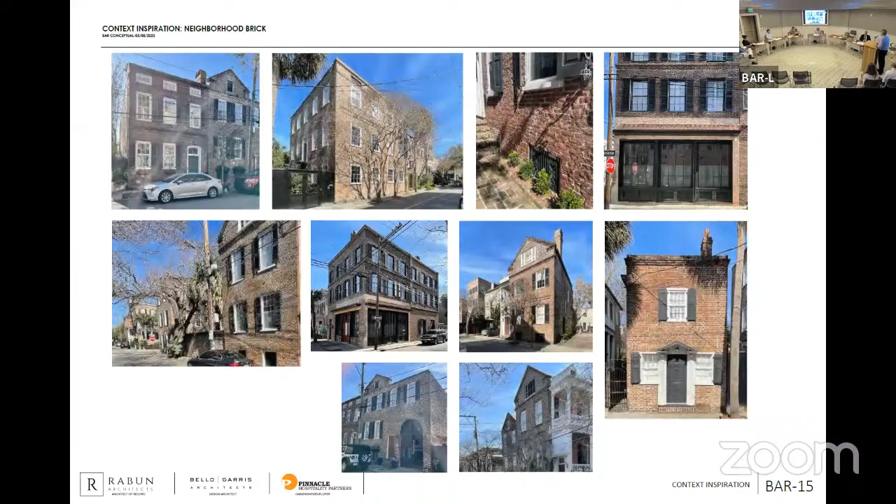Looking a little further, the detailing of that brick, the coursing of how these buildings work, some of the treatments around the windows. Again, a little bit more looking at the detailing that we don't want to replicate, but we want to kind of inform how our design might work.

And then just like everywhere else in Charleston, there's wrought iron, but there's definitely a good bit in Ansonborough. It's a very compact neighborhood, and so there's a lot of wrought iron, so we're very inspired by it. I've presented all this as conceptual, but just as a reminder.

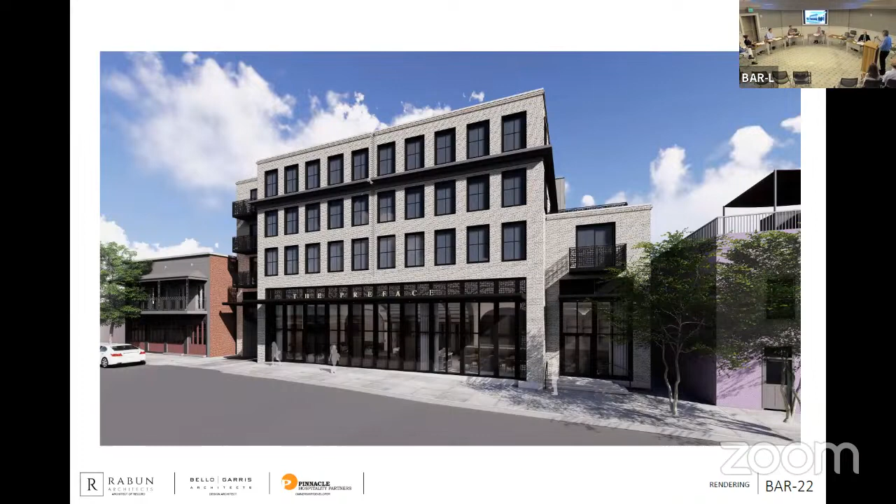Another thing I forgot to point out: on every window we've got a very thin aluminum surround that comes out from the brick 2 inches. The idea is to give a very crisp, elegant definition to the window. It's a detail that's clearly contemporary, but it does announce the windows and provides a little more shade and shadow so they pop out. That same detail comes around the storefront and is out, and then the panels are actually recessed 3 inches, so those panels are 5 inches back from that outer frame.

Some of the details, we spent a lot of time on the detail. This is a good illustration of that brick pattern, but in my mind, this looks way too obvious. That's not the intent, but that's just to show how it works.

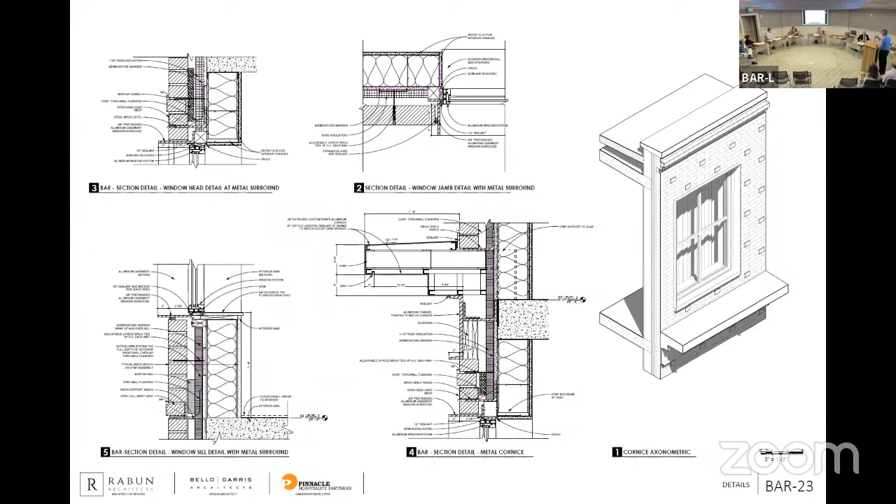These details here, this is a window detail, showing the surround of the windows. The other drawing is the lower cornice, which would all be this black aluminum. Next, just another rendering - as we developed this, we kept updating the renderings.

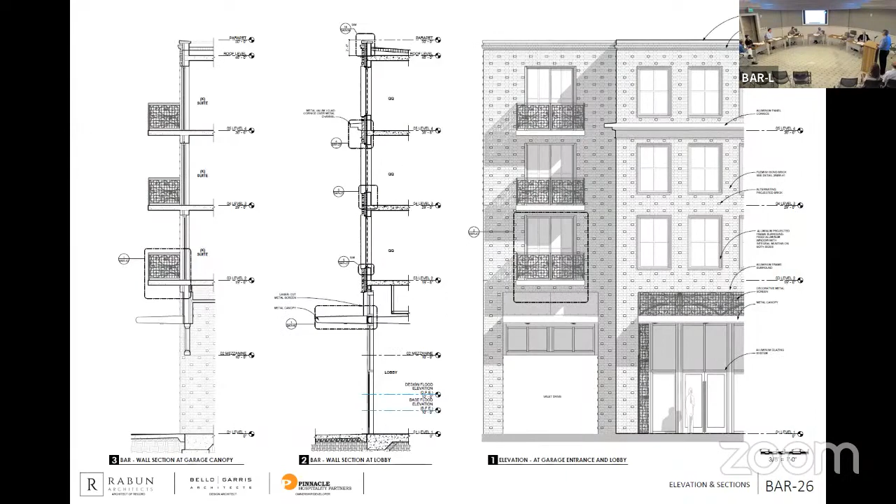There's some wall sections, one's through the garage entry and one's the storefront. Next slide. Talking a little bit more about the screen.

Some of the comments last time were study the screen - should it be a little bit more so you could see a little more of that scrolling pattern? So as a reminder, we literally took a photograph - I did it, which is crazy because I'm drawing stuff. But we created a scroll that we then stretched and pulled, and overlaid that with another pattern.

We did this at conceptual stage. The idea is we don't want it to feel too representational, we want to recall it. That original pattern had a more orthogonal layering, and we were never really sure about that. I know I was a little concerned about it. We got a sample made and we all realized we didn't like it, so we got another one made and restudied that design.

Another thing that's important about these panels - all the fasteners will be concealed, so you'll read them as individual panels, which was intentional, but you won't see the connections. These are set back 5 inches from that frame, so they'll always have this pronounced shade.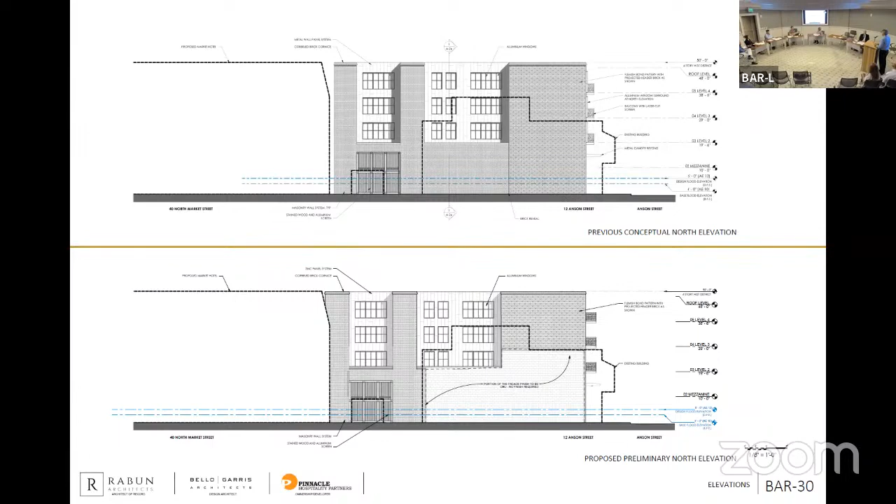Again, part of the construction as we started developing the project. Next slide, I'm almost done.

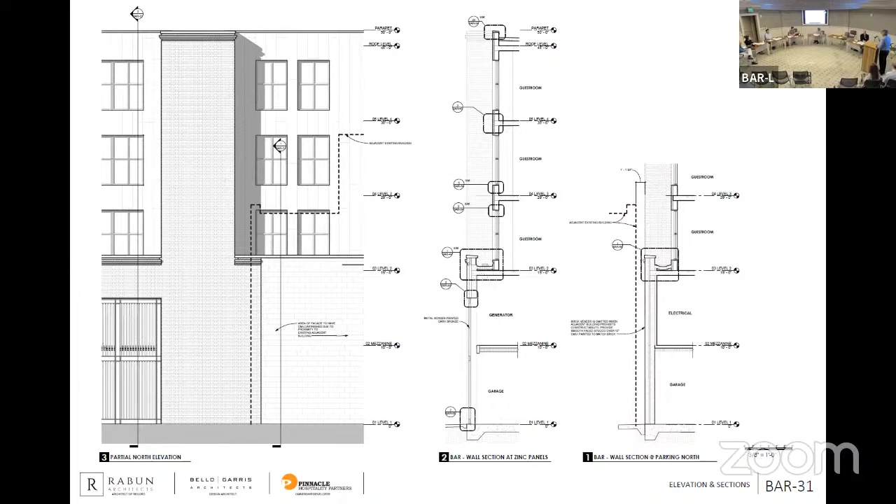Here's a section through the north facade, which has zinc panels, as does the southern facade. Neither of those facades are very close to the public right of way - they're behind buildings and offset - but the intention with the zinc was to have a very simple, quiet material, but very high quality. Next slide.

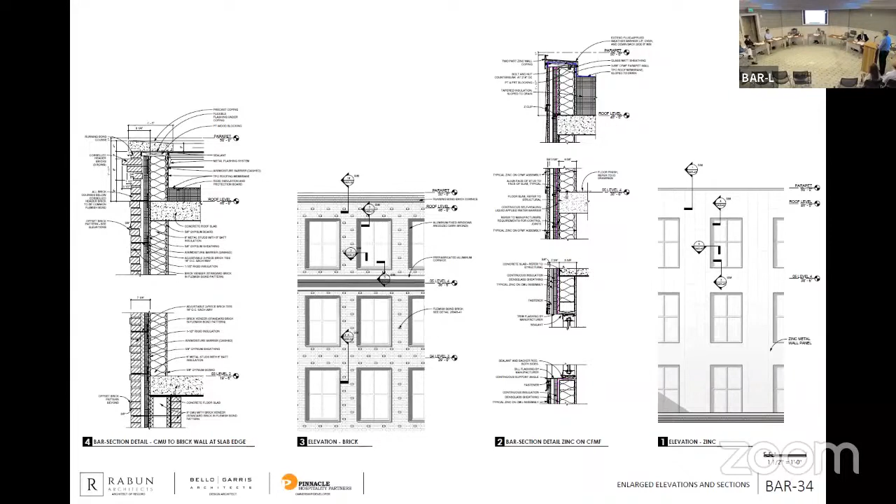Just some more details. One of the board comments was to study how that zinc terminates. So we've got a very simple cap up there. The windows are very simple, no decoration, just a simple punch.

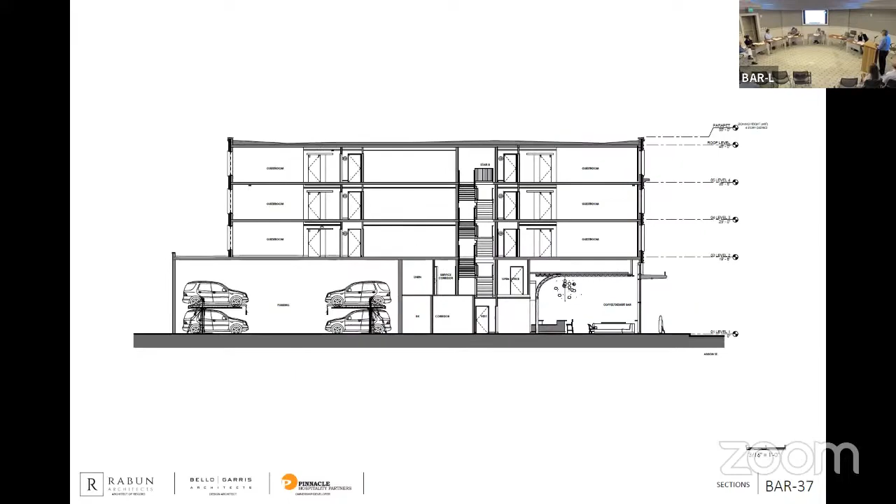Sections, go through these slides. Just a view showing how the panels will work, how the surrounds for the windows will work. The canopy is all aluminum with a sort of a bull nose.

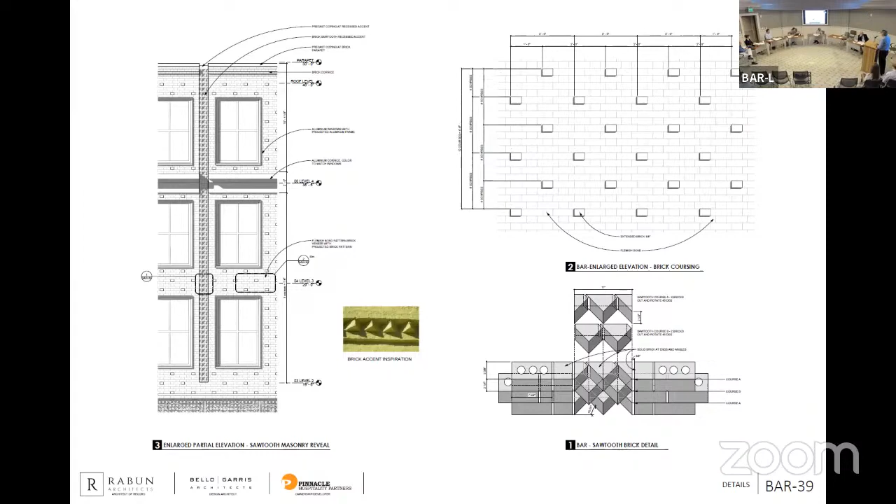This shows that reveal in the center of the building with that sawtooth detail, which we're pretty excited about. Again, that's showing the pattern of the bricks that are protruding. The intention is for them not to be that pronounced, but this is.

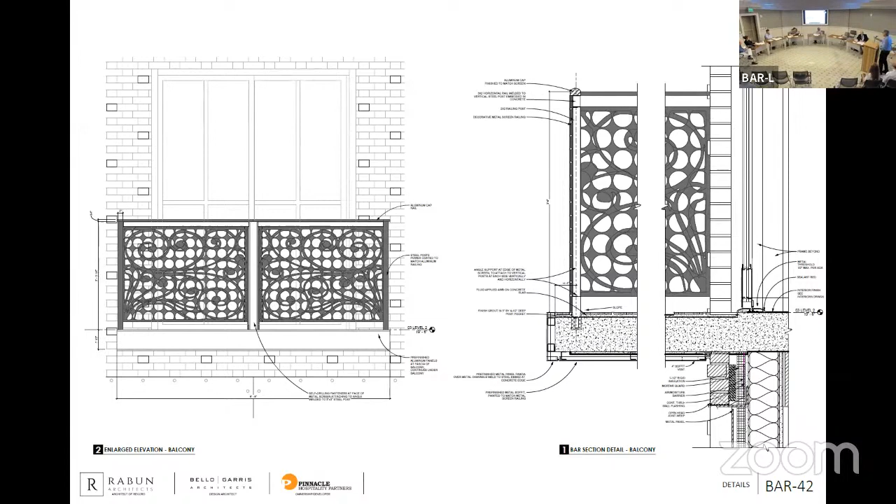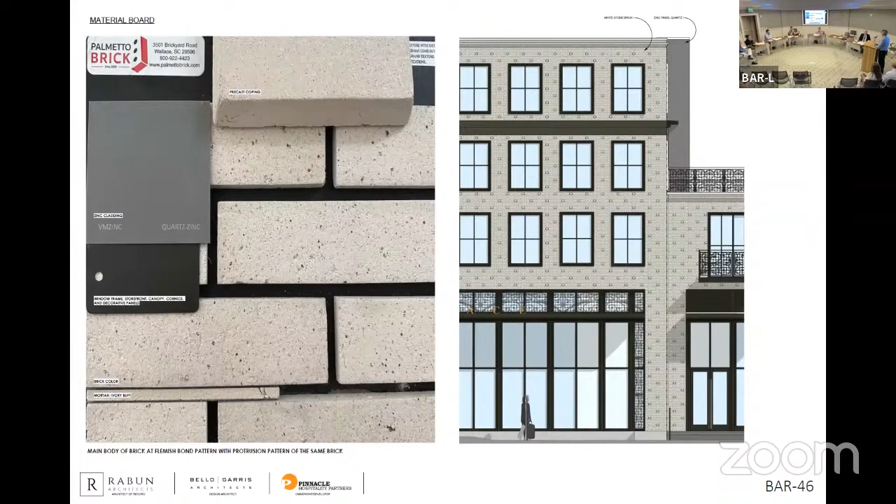And I think that's the last slide. So that concludes my presentation. If you have any questions. Any questions from the board at this time, Mr. Bennett?

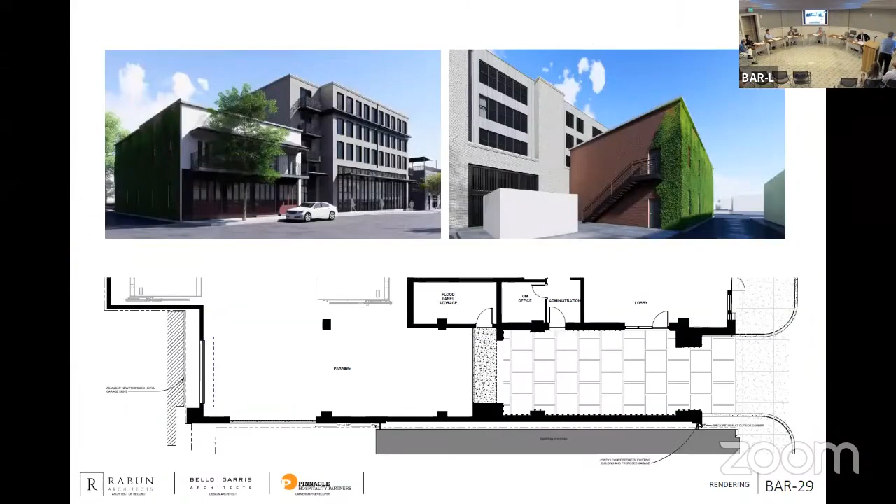One question. Can you go to sheet BAR 29? I'm the glazing police tonight, so a very subtle change, but the windows before were about 8 to 12 inches taller on floors 2 and 3. They were slightly more vertical. And then they were a little smaller on floor 4, which is kind of what you would see in a Charleston building. But now they're all the same, not quite as vertical. Is that something you could go back to?

Yes, that's a mistake. I didn't realize that, Steve. These are supposed to be smaller than this. I did not pick up that. I don't know if it's changed. I think with the study of coursing, the proportions with the windows and the brick, we assumed it would be the same, but we could make that modification.

It's not supposed to be. The original is supposed to be the same. That was an intentional thing. If you walk up, that's a Charleston thing, that you would see smaller windows. That's a miscommunication, they're not supposed to be. I didn't miss that, so that would not in fact be a change from conception. No, we want them to be smaller. We'll figure it out. Okay.

Understood. Well, I think the other ones got smaller, floors 2 and 3 got a little smaller. I see what you're saying. Yes, so these should be bigger, elongated. These would be the same. That's right. I think we want to figure out how to get the windows back to where they were conceptually. That's my only question. Further board questions at this time?

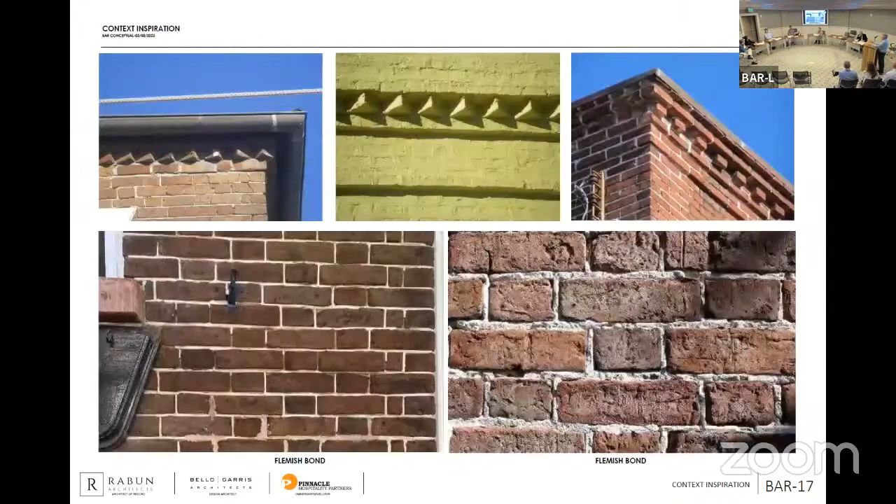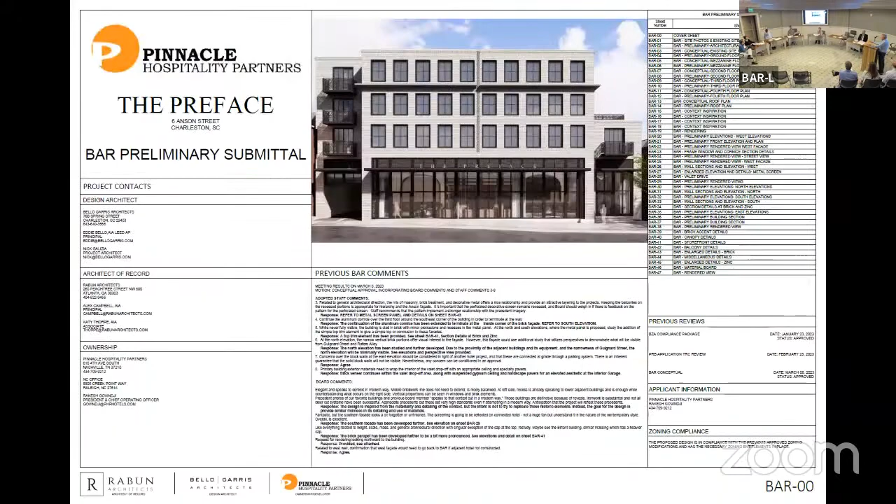So if I understand Mr. Bello correctly, the intention is to have the garage for this hotel discharge its automobiles into the adjacent hotel to be built. Which, it's obviously easier for me to do it this way. So as I understand it, then they would come in from Anson Street. But we don't see anything here in terms of where they're being discharged, or am I mistaken?

Well, that's not being reviewed tonight, so we're not showing that. Okay, so I think that is the plan for them to be discharged into this other adjacent building, and we're opposed to that. The other comment I would make is, this egress alley that's shown here, is that to be maintained?

I'll answer the question when it's not. Yeah, but that's fine, the applicant does respond right now. Yeah, everything's going to be maintained, so no problem.

So we don't show a connection in terms of this discharging into the adjacent building to be built, which I think is a subject matter for this body to consider. Actually it's not - the board to consider that is called the Technical Review Committee, which may have already made binding recommendations in that regard. So to the extent you have inquiry regarding traffic circulation or what the city's requiring in terms of that access or means of discharge, that would be lodged with the Technical Review Committee. It's also a future project, so it's not subject to our purview, but in terms of what exists and what traffic circulation has been allowed, that's controlled by TRC.

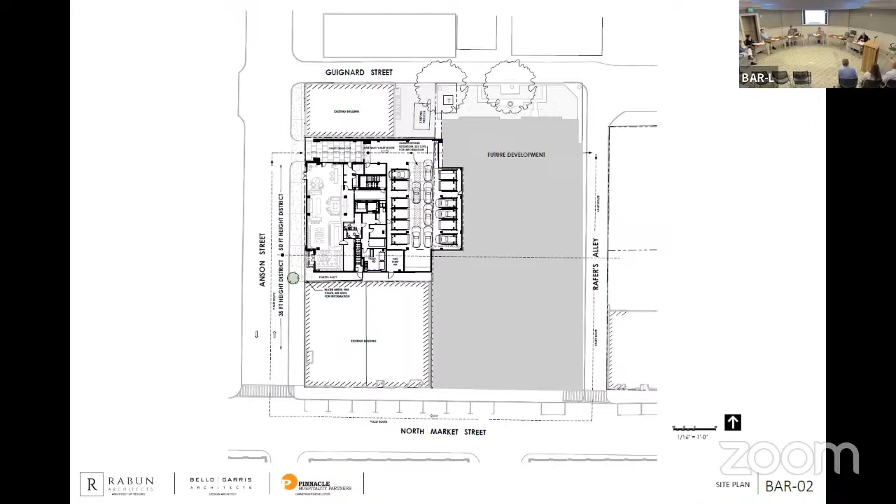The proposed preliminary design of the building at 6 Anson Street indicates additional refinements detailing proposed exterior materials and colors, and addresses staff and board comments from the previous meeting. Proposed materials and colors strike an elegant balance which properly reflect the design of this striking and well-ordered building. A few conditions for approval.

The grade changes in the sidewalk do not appear in the present condition that I can see elsewhere. Grade elevation changes to be carefully coordinated between all entities and handled to minimize or gradually expose the curbing. Two, the exposed curbing should be painted the generalized brick mortar blended color so as to be minimally visible. Three, consider mortar joint profile in order to achieve the textured surface as depicted with a mortar color that reflects the brick. Four, considering the likelihood that development on the adjacent property will occur soon, staff suggests an update from the applicant on the status.

Board may wish to consider a conditional approval on the exposed CMU wall at the west elevation. And staff's recommendation is preliminary approval with staff conditions and board comments, and final review by staff for permit drawings.

Any response from that? One, I think we will of course keep everyone updated on the next building. We're planning to complete work soon. The one thing I wanted to point out, and I think I would request that we sort of study that in the field.

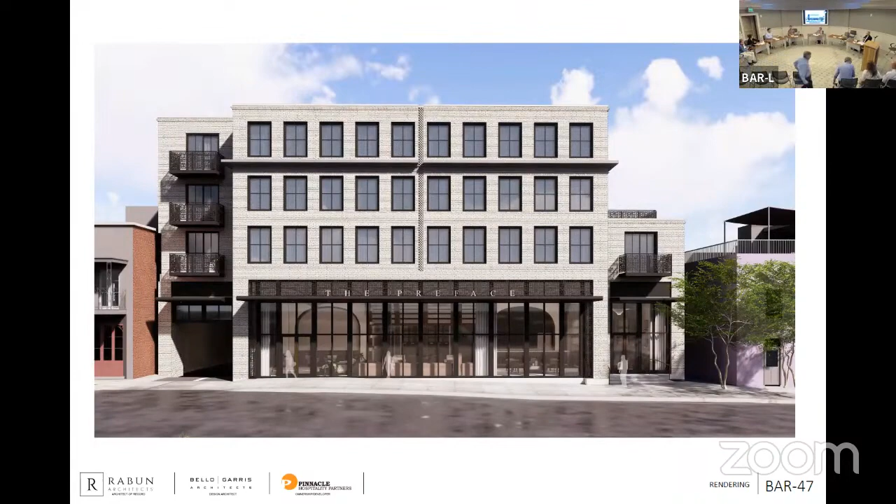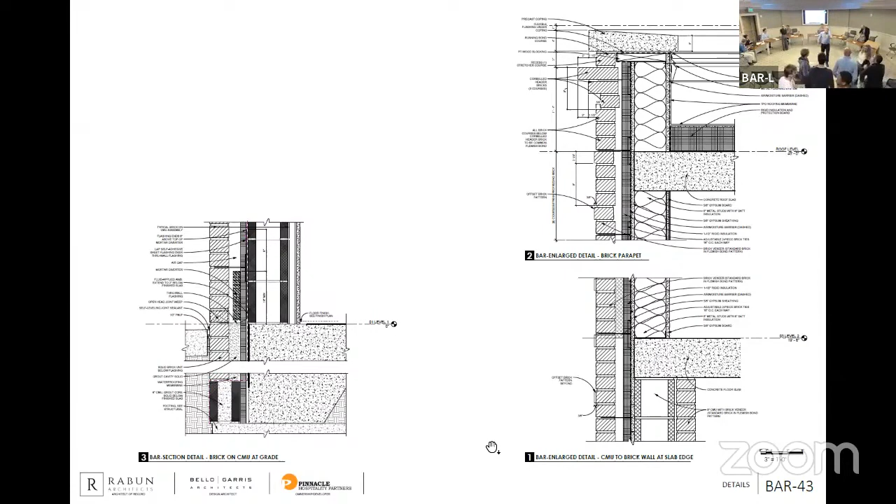Yeah, how do you think it stands, how do you think the look of the building will add to the neighborhood it's going into, just, I'm not trying to push you guys into a corner by any means. I'll bring my camera over here if that's okay. Well, there we go. Your students should get interviewed over here and talk about what a wonderful opportunity this is.

Yeah, it was voluntarily done. We've had that come up a couple times with them because of the phases. There are things that if you just knew how it applies to these buildings, it doesn't work, so we've extended them some latitude. Sure, we've also done some...